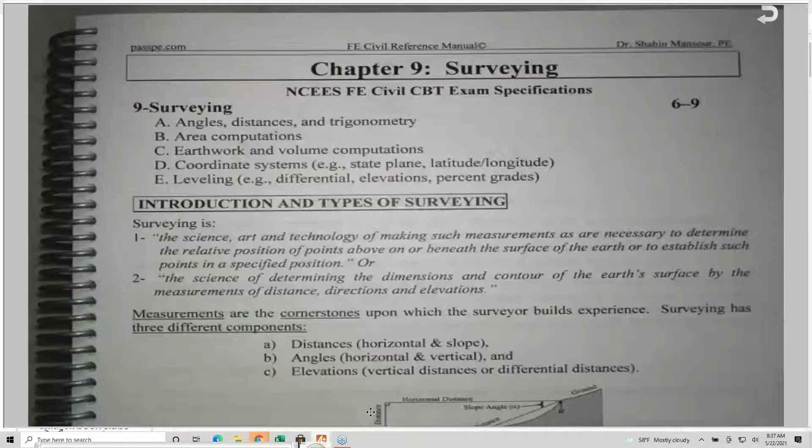So let's start. I started last time, and I will start the surveying chapter from the beginning, and I will do my best. Bear with me, I know there's a lot of material. This is chapter 9. All of you received this, and during the lunch break, as I said, I will do my best to add the 2 problems I would like to add into the transportation chapter. If not, I will send it to you during the lunch break. Please print it, and we will go over transportation this afternoon.

So surveying is chapter 9 per the NCEES CBT exam specifications. Here are the topics listed by the NCEES. I took these topics and covered them using my surveying textbooks, in addition to all the surveying references I have in my library here.

So we covered this last time, so I will go over what I covered last time very quick, just to remind you. The definition of surveying, basically we are locating points horizontally and vertically. So there are two definitions I added here. This figure here, which is figure 9.1, shows the types of distances, the horizontal distance and slope distances. We'll talk about angles, horizontal and vertical angles. We're talking about elevations, vertical distance, or differential distance.

So this is figure 9-2, talking about differential leveling, where we have an instrument level and we have the surveying rod, and we take two shots and we can determine the difference in elevation between points, or determine the elevation of points if we need to do that.

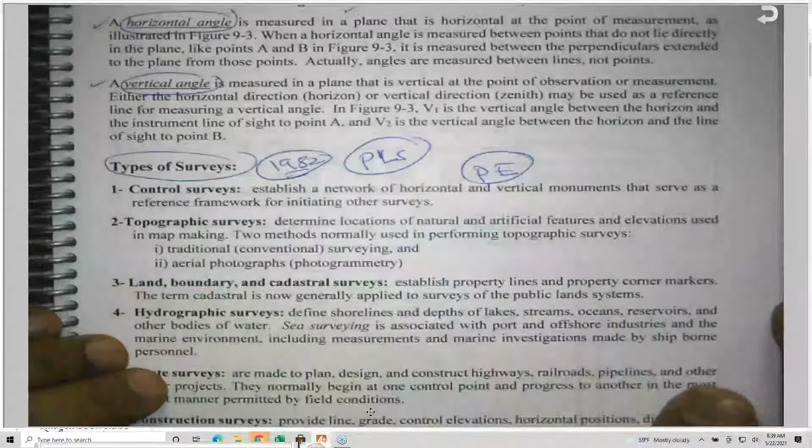I added the types of surveying just for your knowledge, because in January 1982, the PLS, the professional land surveyors, were a little bit unhappy that the PE were doing the same work as the PLS, so they changed the law on January 1st, 1982, where they limit the PE to do certain types of surveying. And the PLS, obviously, can do all kinds of surveying.

But any PE who is registered before January 1st, 1982, is legally entitled to do all kinds of surveying as PLS, but he cannot claim the PLS title because he did not take the examination and the process of getting the PLS license. So, for example, control surveys are limited only to PLS. We cannot do it right now, okay? Topographic surveys, yes, we can do it. Land, boundary, and cadastral surveying, no. Hydrographic surveying, yes.

I don't expect that they will ask you who legally can perform, because this is not listed among the NCEES topics. As-built surveys, which sometimes we call final surveys, after we finish the job with all CCOs and all the change orders. We are required, in fact, to establish the elevations and distances and everything for the job after it's completely done. So when an engineer comes after us, he will see what has been accomplished in the previous job. Mine surveys, solar and condominium surveys.

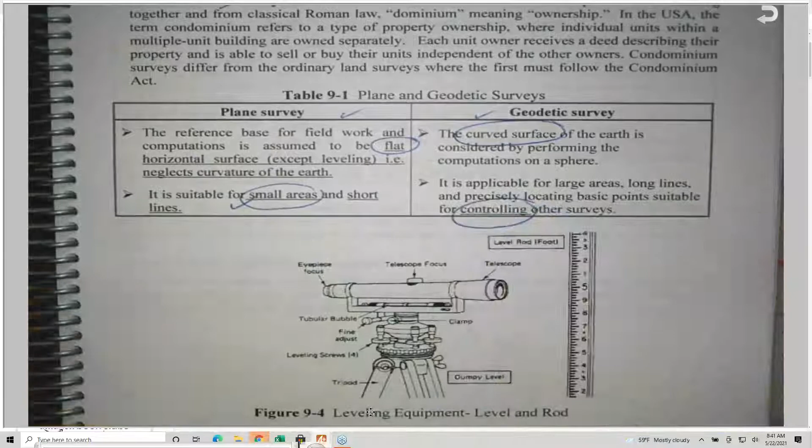Surveying in general can be classified as plane and geodetic surveys. Geodetic survey, obviously, takes into consideration the curvature of the earth. But in plane survey we are assuming that the earth is flat, and this is accurate enough for small areas and short lines. But geodetic we use for establishing the control surveys. Leveling equipment, we are going to see the level and the leveling rod. Figure 9-5, talking about horizontal distance, vertical and zenith angles. All these things are identified here.

Also, surveying can be classified as ground surveys, aerial surveys, and satellite surveys, and I explain the difference for your knowledge. And in the section given in the NCEES, they are asking you to be familiar with angles, types of angles, distances, types of distances, and trigonometry. This is the first key thing you might see on the exam as far as problems. So angles: interior angles, exterior angles, and deflection angles. Deflection angles are really important, and we're going to see them this afternoon when we talk about horizontal curves.

Figure 9-7 shows the types of deflection angles, either to the right or to the left. A deflection angle is formed by extending one line with respect to another, and right deflection angles are assigned positive and left deflection angles negative signs. The sum of the deflection angles for any closed polygon should add up to 360, taking into consideration the positive for right deflection angles and the negative for left deflection angles.

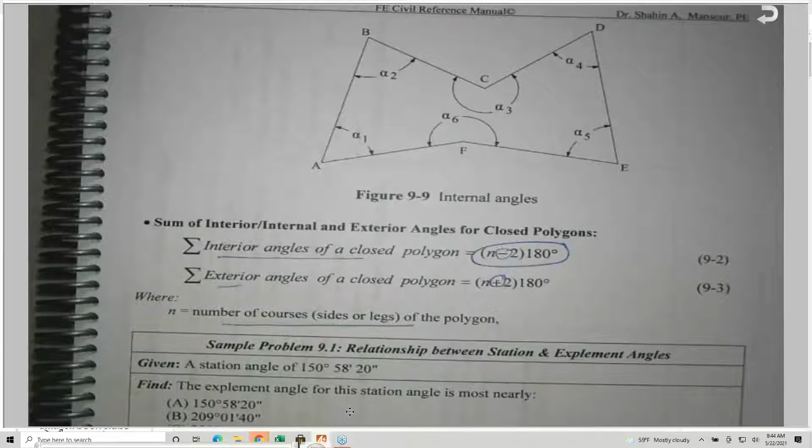And if I remember correctly, in the first homework I sent to you, there was a problem related to this, and I hope that you get a chance to work on homework number 1. I will try to find some time, like office hours, to go over homework number 1, and probably I will give you more homework related to the topics covered after that. So these two equations I need you to be familiar with.

We went over this problem very easily last time, 9-1. This table here shows the summary of the horizontal angles. Probably I will change the title, and please add this, "types of," to make sure that you are really aware that we are talking about horizontal angles. Okay, so the deflection angles, we said they add up to 360.

The n minus 2 is for the interior angles, and for the exterior angles, n plus 2. So this is a plus and this is minus. And here we're talking about horizontal angles, and probably I will modify this table to add the word horizontal, to indicate that we are talking about horizontal angles, not vertical angles, because it's very important to distinguish between horizontal and vertical angles. So if you flip the page, you will find the definition of two types of angles, vertical and zenith angles. So I define each one of them.

Vertical angles are really important. For the sake of the exam, I don't expect they will ask you about something related to zenith angle, maybe, but here is a definition just in case. And you need to be aware that for vertical angles, we have the plus and the minus. It is a plus if it is above the horizon, and a minus if it is below the horizon. So any vertical angle above the horizon or above the horizontal is considered positive. Any vertical angle below the horizon is considered negative, okay?

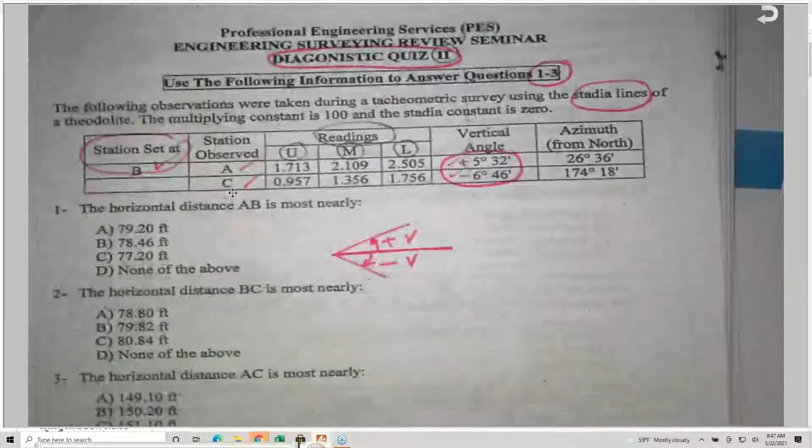And there is one problem specifically, I will be glad to send it to you, on the vertical angle here, plus and minus. This problem is a very good problem. In fact, it does have the law of sines and law of cosines, plus all the terms related. I will be glad to send it, or maybe I include it as part of the homework. But for the time being, let's focus on what's here, because I need to be very concise to the NCEES topics only, without really going beyond that.

Bearings, we talked about bearings. The bearing of a line is its direction within a quadrant. We have 4 quadrants, as you know, and for bearings we need the north direction or the south direction, and the angle in between, like southwest, northwest, northeast, and so on. So basically, you look to the north direction, and this is the south, this is the east, and this is the west. So the line could be here or here or here or here. So it is northeast and northwest, southeast and southwest. But we need an angle, degrees, minutes, seconds.

And as I mentioned last time, please do your best, whatever calculator you are using. This is the calculator that most of the engineers are using for the FE. It is the Casio FX-115ES Plus, and they have different new models, in fact, but most of them work the same way. If you are using HP or TI or other calculators, please do your best to make sure that you know how to convert degrees, minutes, seconds, because it's very important.

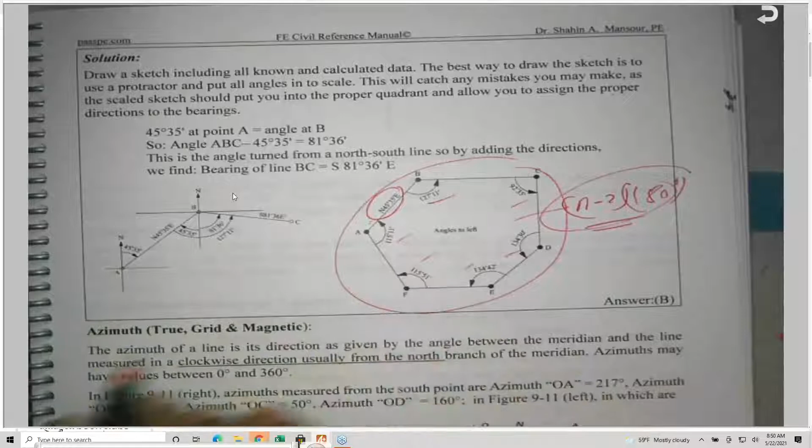Basically the bearing of this line is given, this is northeast. And if there is no adjustment for the angles here, in this case we are assuming that all the angles are correct, and after that we'll proceed with the calculation. This is northeast, which is a given bearing for line AB. For line BC, you draw, and here is the angle 127.11.

So in this case we can determine the bearing of this line, and always draw a sketch, please, a sketch or a free body diagram. Azimuth: the azimuth of a line is its direction as given by the angle between a meridian and the line, measured clockwise only. So the azimuth is measured clockwise only, and normally you measure from north.

And the azimuth could be, by the way, true, grid or magnetic, like bearings. A bearing of a line could also be a true bearing, a grid bearing or a magnetic bearing, and I'll be glad to talk about the difference between these later on. So basically you are rotating the angle clockwise, measured from north, and I give you some examples here.

We need to know also what is known as forward and back azimuth, and forward and back bearings. So for a line CD, when we say the bearing or the azimuth of the line CD, this is the angle CD, but for DC, in this case you are going to add 180 to it. So we have something called forward. So the bearing of line AB,

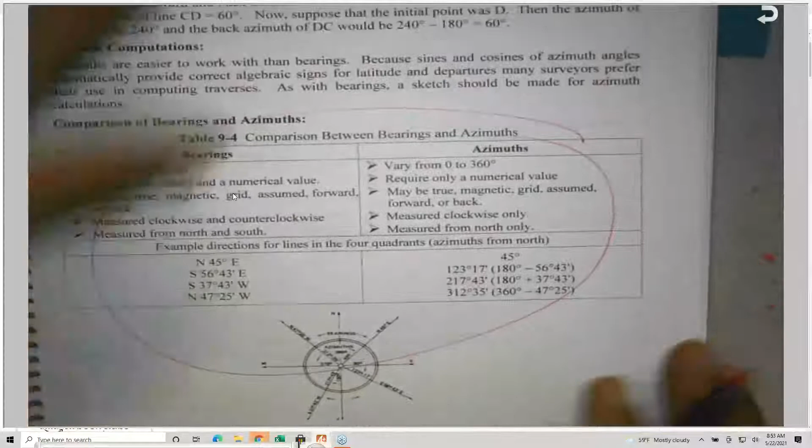I provided a table also. In all my books, the 15 books I have, I always try to make it as simple and concise as I can, with tabulated values or tables in general. I found it's a very effective way, and engineers like that. So this is the table that shows the difference between bearings and azimuths.

So bearings vary from 0 to 90. Azimuths are 0 to 360. Bearings require two letters and a numerical value, like northeast, southeast, southwest, northwest, and so on. So you need two letters and a numerical value in between. They might be expressed as true, magnetic or grid, or even sometimes assumed. Sometimes we assume a bearing, forward and back also.

They are measured clockwise and counterclockwise. So this is clockwise, and it could also be measured counterclockwise. It depends on the quadrant. We have, this is north, this is south, this is east, and this is west.

So this is quadrant number 1, and this is quadrant number 2, quadrant number 3, and finally quadrant number 4. So it depends on the location. But for the azimuths, the azimuth of a line is measured from north and measured clockwise only. Very rarely you will find that the azimuth is expressed from south, but they agreed from north and clockwise only. But for the sake of the exam, if he gives you azimuth measured from south,

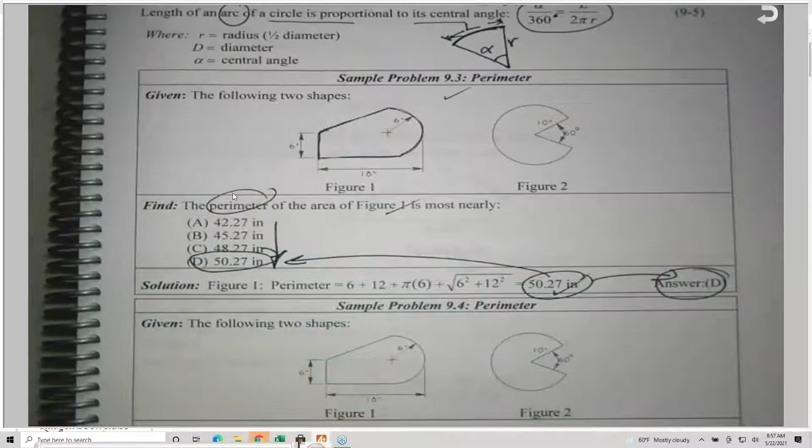A few problems. 9.3: we need to get the perimeter of this. Perimeter means you are going around it, walking or running, if you have a track like this. So basically, you are adding all these things, and this is very easy. The perimeter, here it is; check my calculations, and also look at the four possible answers. Sometimes I change the order. For example, this is 50.27, answer D. If you find a typo or a mistake, let me know, and the final copy will be reviewed more than once by me or by some of my assistants.

Problem 9.4 is asking for the perimeter of this figure 2. So basically I need this, and I need what is on the remaining portion of this circle. That is what is meant by the perimeter. I will go around this. I need this here, and this here, and the entire perimeter, but I will subtract this. There is more than one way to do it, by the way. This is the way I did it. I have 10 and 10, because the radius is 10, plus this is 60.

So what is left here? 360 minus 60, which is 300. So 300 degrees. That's why I use 300 degrees, the difference from the entire circle angle, which is 360. So I proportion the 300 with respect to 360 and multiply by 2 pi r, as if the circle were complete, but we are missing a portion of it. So in this case, we proportion the central angle with the entire circle angle, 360. And again, 72.36, this is answer B. So far, so good.

If you look at the trig, there are two important laws, and these are given in the math section. I hope all of you have the NCEES handbook 10.0, which I mentioned more than once. You can download it or purchase it from the NCEES. Please do your best to get this, because I will refer to it a lot. Every time I need to show you where these equations are located in the book, because this is the only book you will be seeing on the exam.

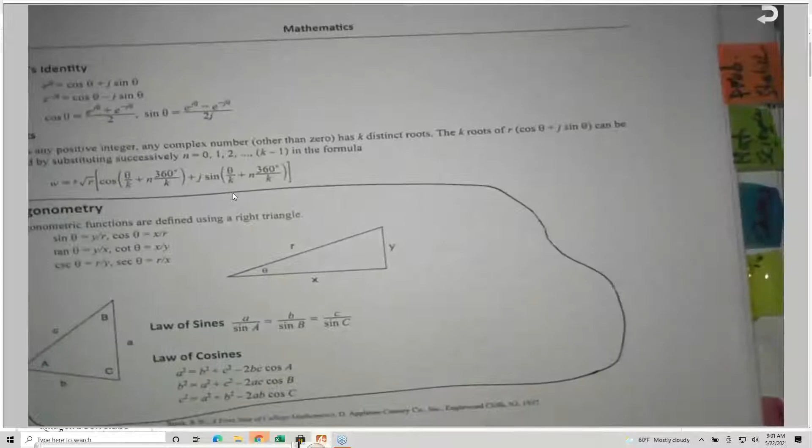If you have suspicion about one of these equations, you can go to the section of the NCEES reference book and locate it. For example, this is what I'm looking for. Here it is, on page 37.

So the trig section, here it is. This is the definition of sine, cosine, and tan, and here are the two laws I'm talking about. This is on page 37 of the NCEES book, and I'm using the same notation they are using: A, B, C, and here are the two laws I just talked about.

Be careful, because the angle will be given to you in a certain way. If you do this math, you will not get this directly. You'll get an angle in degrees, and after that you are going to convert it to degrees, minutes, seconds, as indicated here.

Area formulas: we have area by coordinates, trapezoidal rule, and Simpson's 1/3 rule. Those are the three methods discussed by NCEES. There are other methods, but those are the three given in NCEES. The reason we need to calculate area is because it's used to calculate the volume of earthwork. We're going to see three methods: the average end area method, the prismoidal formula, and the prism or pyramid or the 1/3 rule.

I did my best by providing a little bit of theory about what I'm talking about, for example methods of measuring areas. Can we measure an area? Yes, it could be measured or it could be calculated.

Field measurements, if you go to the field, will be more accurate. If you have a piece of land and I ask you what is this area here - the parcel I bought - and I need you to verify the area is right, you measure the dimensions, and then you can divide it into small figures, regular figures, or simple figures: rectangle, triangle, trapezoid.

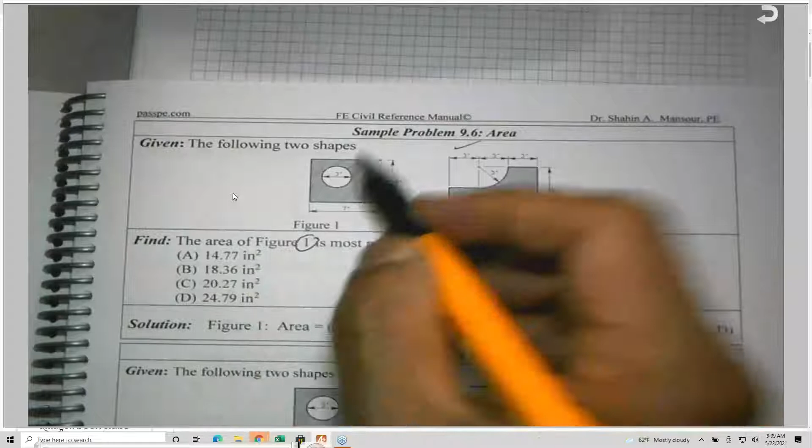9.6. I have two figures. What is the area of figure 1? So the shaded area, this is probably what is meant, at least this will be much more precise. So basically, you can take the entire area and subtract a quarter circle and subtract the circle.

And this is what I did here. So you can say that this is 5 and this is 7. So 5 by 7 will give you the area of this rectangle. And you subtract a quarter circle, which is pi r squared divided by 4, which is a quarter. After that, we subtract the area of the inside circle. So this is one way.

There are some engineers who do it differently, or you may do it differently, but normally I encourage everybody to ask, if you solve a problem, this famous question I raised last time: is there any other method, or way, a shortcut if you like to call it that? I have no problem with that, because we need to save time. So if you solve the problem, ask yourself is there any other way to do it that's much easier, less computation, or fewer steps. Please try to ask yourself this question, because time is the biggest enemy for you during the exam.

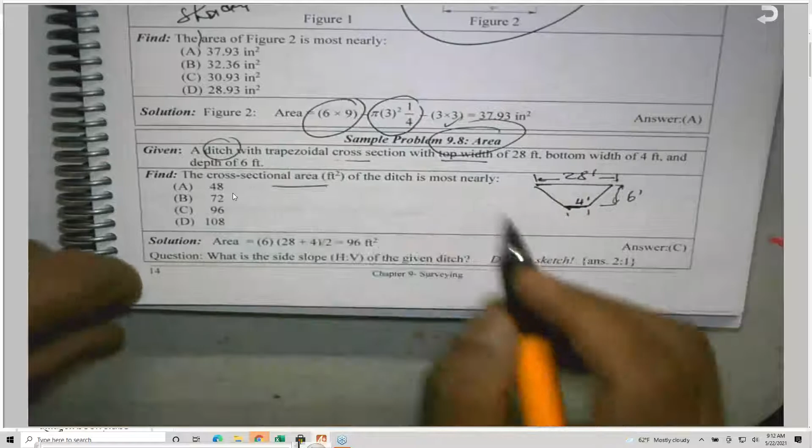So basically, this is a trapezoidal shape, like an irrigation channel or a ditch, something like this. So it's asking what is the cross-sectional area. This is an easy one: this plus this divided by 2, times h, and here it is. And units, by the way, be careful. Sometimes they can ask for this area in inch square, yard square, name it.

So we need to be familiar with the SI units. I believe the exam is given also in SI, if I'm not mistaken. I don't know if they mentioned this at the beginning or not, but I believe the SI units, the System International, could also be included. They have tables at the beginning to convert the units, at the beginning of the book, by the way: units and conversion factors.

This is the NCEES. You need to be familiar with this because we have the acres and square feet. How many square feet per 1 acre, the famous number 43,560, and also they have it in metric, so we need to be familiar with the metric also. And they have the significant figures also in the brief. This is page 1, by the way, units and conversion factors, on page 1 of the book.

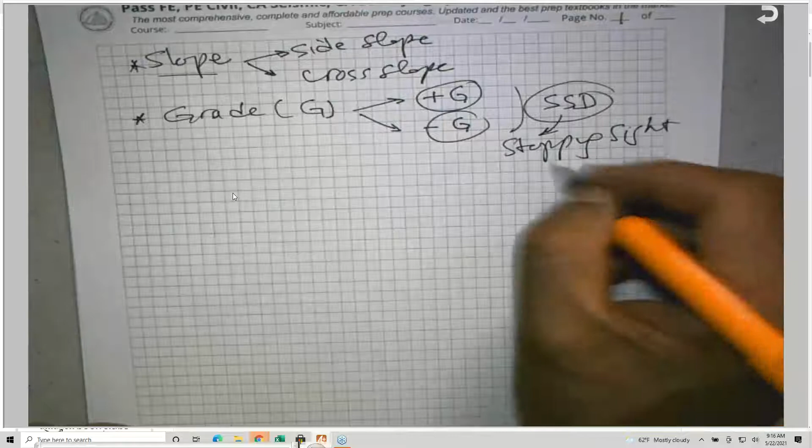And the one we covered last time, do you remember? Saturated surface dry. This is for the aggregates, for the coarse aggregate and the fine aggregate. After we do the calculations, we need to make sure that we adjust the fine and the coarse to the SSD condition, saturated surface dry condition.

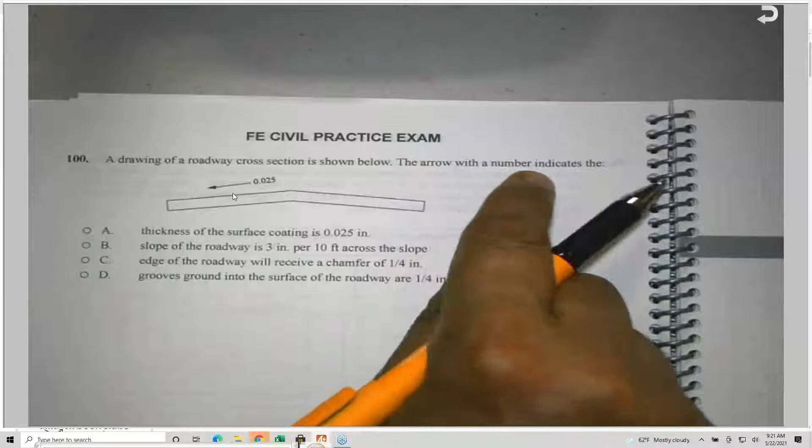For example, here, this is a cross section. A drawing of a roadway cross section is shown below. The arrow with a number indicates what? So this is what I'm talking about. This arrow here, and we put the number. We put, for example, 2%. Or sometimes we put it that way, as 0.02, like this. This is the same as 2%. So this is correct and this is correct. Normally we prefer the percent, but he gave it to you like this.

So the arrow with a number indicates what? This number here indicates the thickness of the surface coating? No. The slope of the roadway is 3 inches per 10 feet across the slope, or the edge of the roadway will receive a chamfer of 1/4 inch, or a groove ground into the surface of the road 1/4 inch deep. So what do you think? And again, they give you 4 possible answers, and you need to make sure that you are picking the best. And some answers sometimes confuse you.

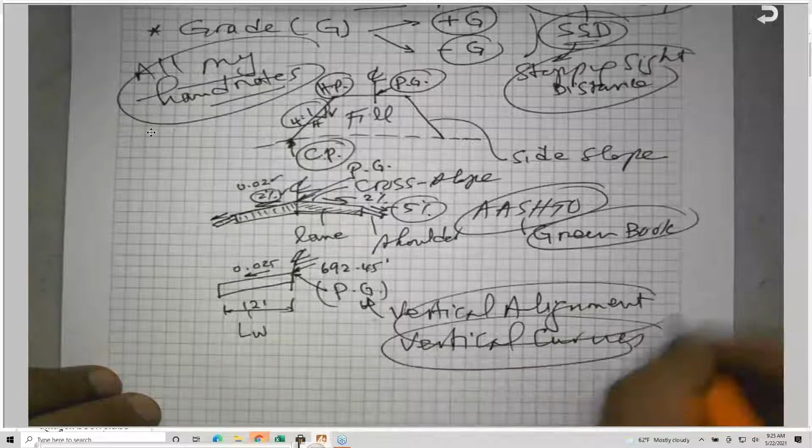So if this lane is 12 feet, which is a standard lane width, we call it L sub W, lane width, and this is given as 0.025. This point here has an elevation. Let's assume it is 692.45 feet. If this is the center line, this is the profile grade, we call it PG. Sorry, I'm using a lot of abbreviations; you will recognize them by repetition. The PG is the location of the vertical alignment, which is basically vertical curves. We're going to see it this afternoon. Vertical alignment consists of vertical curves and tangents.

So right now, if this is 12 feet, how much is this elevation here? We call this ETW, edge of traveled way, and this edge of shoulder, ES. Some books call it E sub P, edge of pavement, but ES is the name commonly used. So if this elevation is given to be 692.45 based on your profile, which is the vertical alignment. Profile, vertical alignment, vertical curves, they all mean the same thing.

So this distance, that 12 feet, is measured horizontally. Shall we consider the slope? Yes, but it will not make much difference. So this elevation here is 692.45 minus 0.025 times 12 feet. This gives me the elevation of this one. It is lower to ensure that the water will run and not stay on the lane. So the slope and the cross slope are very important, and I will repeat them again.

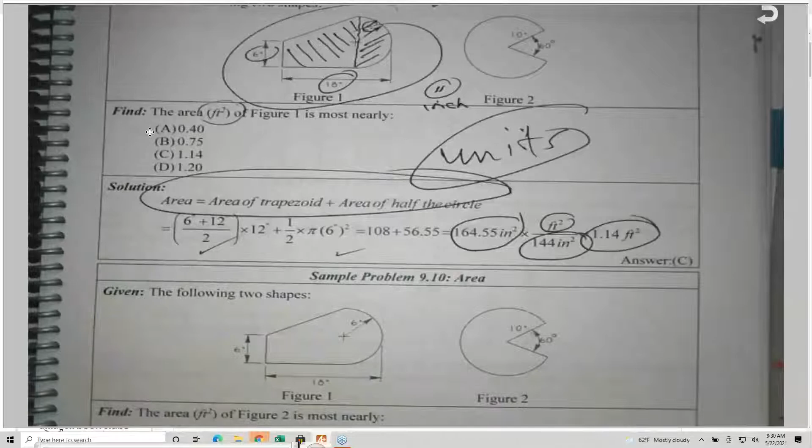Common units, okay? And probably some of you took a class with me before. NASA is a great agency, but one time they lost a satellite because of the units. To the best of my knowledge, it was from English to metric, so they lost a satellite. It was very expensive because of units. So don't misunderstand me. NASA is a great agency, but they are human like us. We make mistakes, but they review everything, not once, not twice, 3 times. But units, so we don't like to lose the exam.

How much do they charge for the exam nowadays? 225 for the exam, I believe. Or they reduced it. I believe they reduced it to 175. They give discounts nowadays. Okay.

So we don't like to lose the exam because of units. NASA lost a $125 million satellite because of units. We don't like to lose the exam because of units.

I needed to remember what is the current price. It doesn't matter, because time is more valuable than money nowadays. Time is money, and especially you are going to stay away from the family, and the family will complain, my God, when are you going to finish the FE? Then you need to tell them, wait a second, it's not just FE only. After the FE, I'm going to go for another exam. It's called PE. Oh my God. So let us just take one at a time. Let's finish this first, and after that, go to the second.

Okay. Problem 9-10, which is the following problem here. This is the second figure. We need the area of this figure too. Again, we are missing this portion here. So it is the area of a circle. Assume this is a complete circle, and I'm going to deduct the area of a sector.

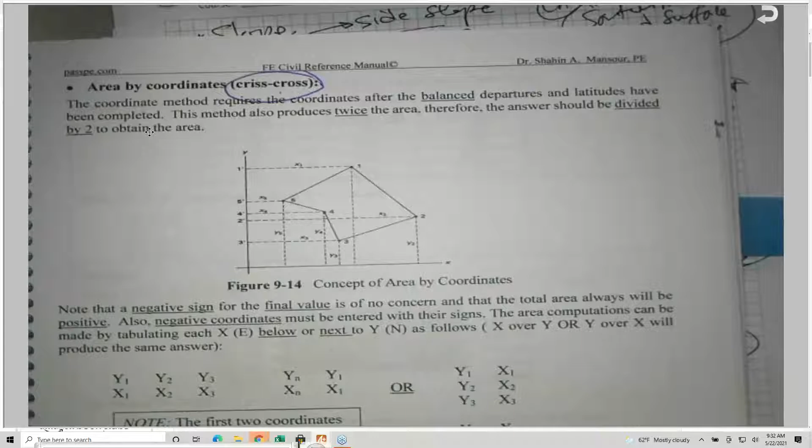They call it coordinates, which is a standard name, but some surveying books are using crisscross. I need you to know two facts about this. Let me write it down. Okay. At least you can write it after me. Okay.

Okay. So the area by coordinates, fact number one. In order to do it right, this method will give you twice the area. So you have to divide by 2. So this is fact number one. When you calculate the area, don't forget the 2. The 2 is already built in the equation, but sometimes we forget that. But I need you to know that this method will give you twice the area. This is fact number one.

Fact number two, in order to do it right, you must repeat the coordinates of the first point. Repeat the coordinates of the first point. It translates into English, Dr. Mansour. Here we go. Because again, we need to make sure.

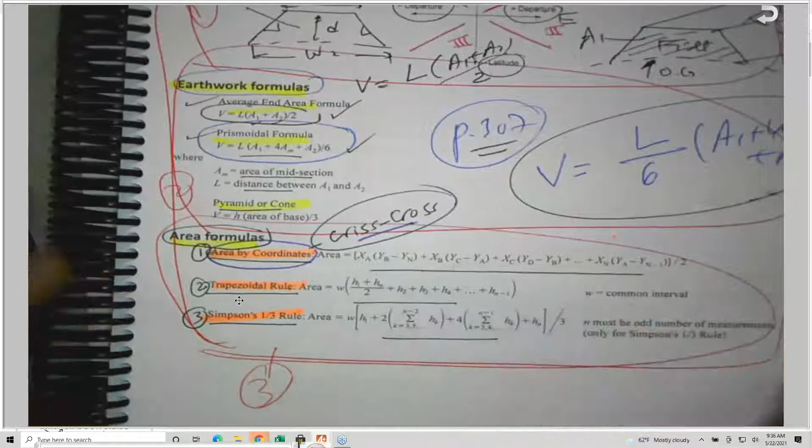Okay? So if this point is minus 3 and 6, and B, for example, is minus 3 and 9. And this here is minus 1 and 12. And this is 6 and 14. Assuming that these coordinates are given.

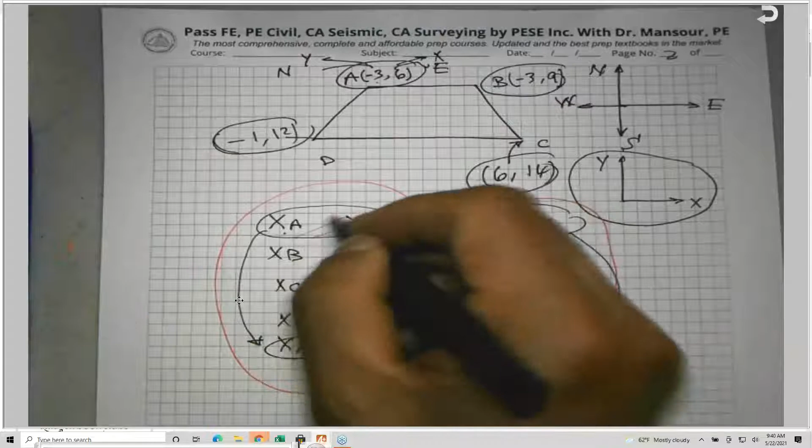Okay? So this is correct and this is correct, as long as I enter the coordinates with the same order. If I start with X, I have to start with X for all of them. If I start with Y, I have to start with Y for all of them. And don't forget, the first two coordinates must be repeated. After we put these coordinates like this, whatever the numbers, I do something, and I need you to pay attention to this. He gave you the equation, but I need you to understand this, because of one little tiny mistake, if you did it on the exam, or if I did it on the exam.

So what is the coordinate method, or crisscross? We multiply this times this, and this times this, and this times this, and this times this.

So the area, sometimes we use A for it, okay? Basically, it is 1/2, because we said that this will give you twice the area, so I have to divide by 2 and open a bracket. I multiply XA YB, plus XB YC, plus XC YD, plus XD YA, and close the bracket.

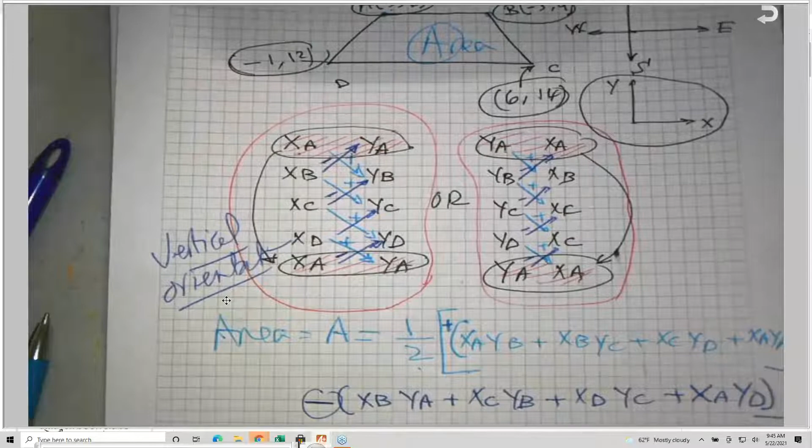This is if you arrange the coordinates vertically. This is vertical orientation. Can you do it horizontally? Yes. For example, this is XA, YA, and this is XB, YB, XC, YC, XD, YD, and don't forget to repeat the coordinates of the first one, XA, YA. So these two coordinates must be repeated again.

And in this case, this is a plus, 4 multiplications, and this is a minus. And it will also give you twice the area. So this is correct, and this is correct, as long as you maintain the order: XA YA, XB YB, XC YC, XD YD, and you repeat XA YA at the end. Don't forget to repeat, and after that, designate a direction to be positive.

The negative, by the way, may be larger than the positive, and you end with a negative area. There is no such thing as negative area. This depends on the direction. We take the absolute value. So don't be surprised if the negative products are larger; it depends on the direction. Don't worry about it. This is the best way that I teach it for the class, and I will examine the equation.

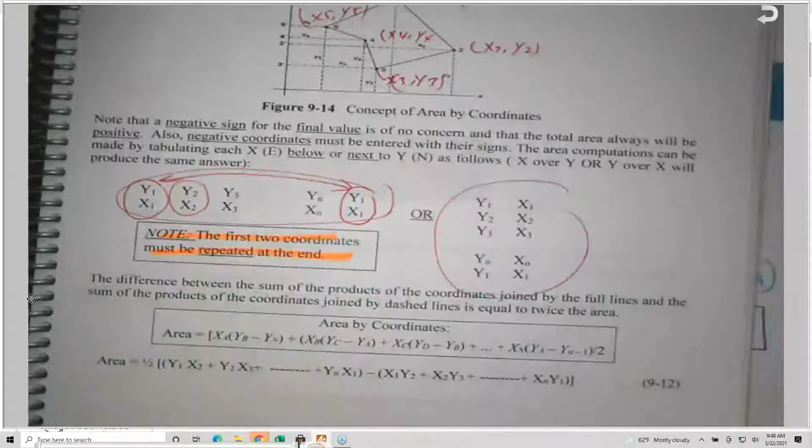But the most important thing is that X1 Y1 or Y1 X1 must be repeated again. I put this here as a note: the first two coordinates must be repeated. And I mentioned that this will give you twice the area, so you have to divide by 2. As you can see here, vertically, Y1 X1 and Y1 X1 are repeated.

This is the equation that is given in your book, in the NCEES. Here it is: XA times (YB minus YN), YN is the last one, plus XB times (YC minus YA), plus XC times (YD minus YB), and after that, they divide by 2, because it is twice the area.

We need to guarantee this problem because it is easy and straightforward. And this is the equation.

He arranged it that way. This is the NCEES equation. But be careful, this is YN minus 1. Be careful, okay. NCEES, NCEES.

My preference is my equation, which came from the 1/2. You can put the 1/2 at the end, by the way. It's not a big deal.

And I have here, these are the pluses and these are the minuses. But I put the minus here. And I said Y1, X2, this Y X2, Y2, X3, Y2, X3, and so on until YN times X1. So I finished.

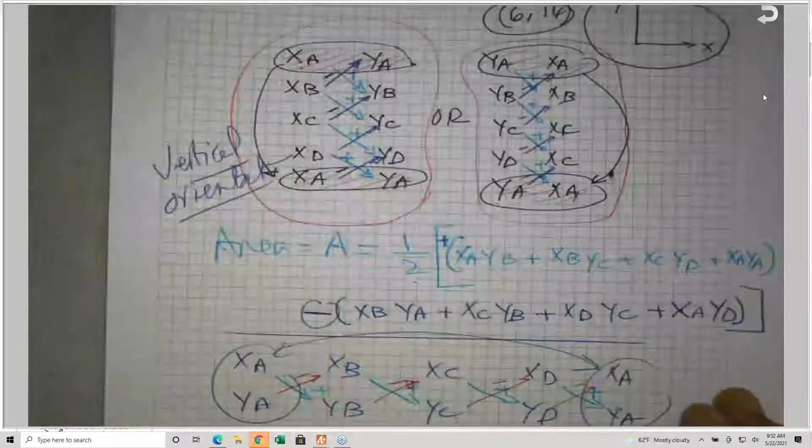This is exactly as the NCEES. Let me see if I wrote something wrong here. I don't know which one you are referring to. In your notes, in my notes, okay, let's look at my notes. Probably I did something wrong.

Let's correct it immediately. Okay, so it is 1/2 X A Y B plus X B Y C plus X C Y D plus X D X D Y A. Yeah, this is... X D Y A, okay. Sorry, here it is, X D Y A.

That's correct. And after that, X B Y A, X C minus X B Y B, X D Y C, and X A Y D. That's correct. So this is a typo, or the mistake that our friend found. Thank you very much. So this is X D, Y A, which is the last X D Y A. So I put X A, okay.

So please pay attention to this, and it is very easy and straightforward as long as the most important thing, which is fact number 3, if you have negative coordinates...

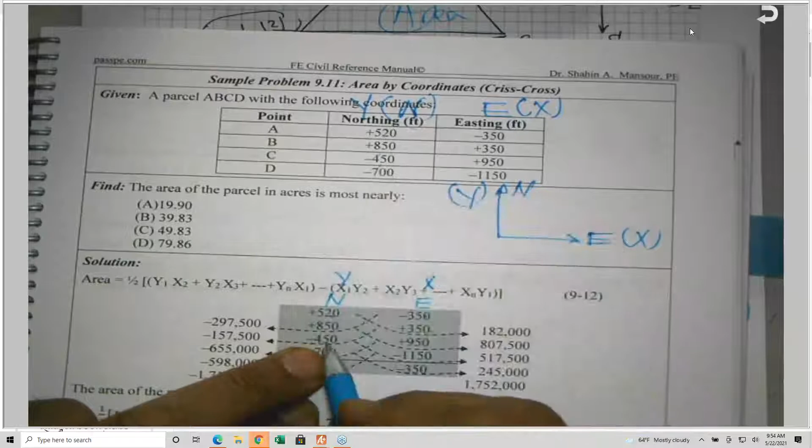And the second one, 850 and 350. And minus 450, you have to enter it with the sign. Okay, a plus 950. Negative 450, 700. And don't forget that the first two coordinates are repeated again.

Here we go, I will put an arrow like this. And there is a minus here. And don't forget the half.

And the area could be in acres. These coordinates are in feet, so we need to divide by 43,560, because 1 acre is 43,560 square feet. Who said that? As I told you at the beginning of the book, on page number 1, you will find that the one I was referring to is on page 3: 1 acre is 43,560 square feet. Here it is.

And I'm sure that all of you remember that. So if the minus is greater than the pluses, don't worry, the area will take the absolute value. So if you end up with a negative number, don't say, oh, what does it mean, negative area? No, it's just the direction and the order.

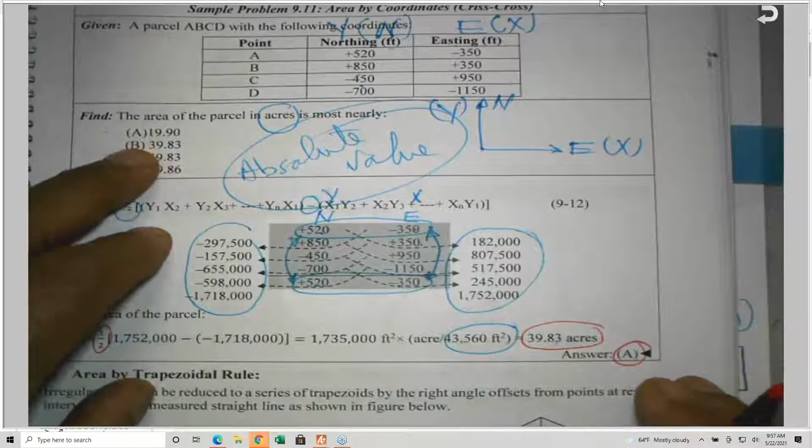Probably, because this is twice this, and probably that's what I meant. I will review it one more time. Okay, I will review it one more time.

So these are the products, four products, okay, minus, and this is a plus. So it is 1752 minus this, the minus, so it is the total, and 1/2 divided by this. Let me bring my calculator very quick, the other calculator.

So I believe there's a typo here, it could be, so this is 1718 and 1752 plus 0.5 times, so 1735, that's correct, and 43,560 divided, and 100, okay.

So 1,735,000, enter 43,560 divided, so 39. So this, the answer is B as in boy.

Okay, and I will review it one more time because here it is. Okay, so the product here, but this minus is a part of the equation. Okay, but this minus here, because some coordinates are minus, so this is the sum, by the way. This is the sum, this is the sum. Here it is, if you add all this, we end with this, end with this. So minus will be plus, and take half, and you divide it.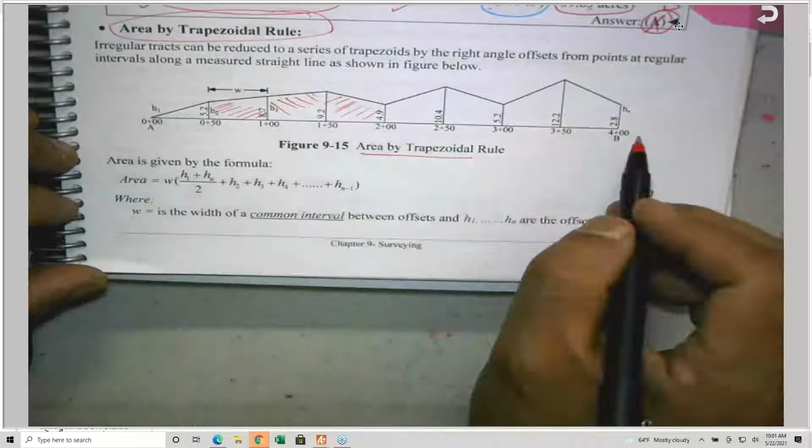Okay, so a trapezoid, obviously, this is an area by the trapezoid rule. This is a trapezoid, okay? So basically, we have a reference line, like line AB. And here are stations. This is station 00, station 0 plus 50, station 1.

Station is a distance, okay? Station is a distance, and we're going to see that. So in this case, the area will be like this. The W, which is the width.

Here it is, the width, and this is a common interval, meaning that the width is constant, that every 50 feet, this is 50 feet, and this is 50 feet, and this is 50 feet, or 50 meters, it depends on the units, is a station. A station is 100 feet, or 100 meters. And half a station, obviously, it is 50. This has H1, H2, H3, and so on.

And this is the equation that is given, which is the same equation, I believe, in the NCEES. Let me make sure that normally I try to use the same notations they are using, because I don't like you to be confused. Yeah, here it is, so this is exactly, I'm using the same notations they are using for a trapezoidal rule. This is the NCEES equation. So this is easy and straightforward, and you'll find that I solve a problem.

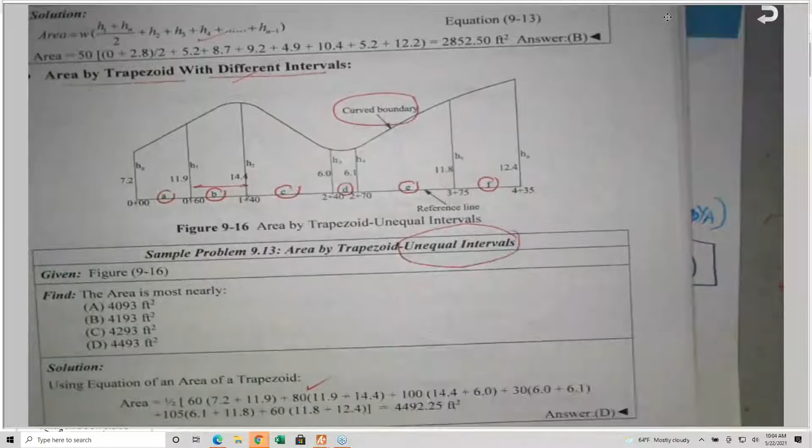But this is of unequal intervals, and he might ask you about that. Make sense? So you need to be aware of that.

So I need you, please go over these and let me know if you have any question about this. I included something about the planimeter, even though it's not mentioned in the NCEES, but I said, let me go over it.

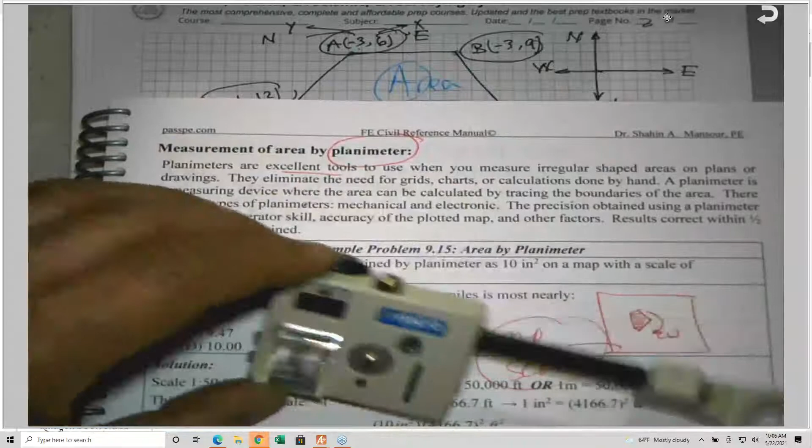This is something called the Vernier scale. A very, very old method, but still they're asking the engineers who are taking the exam for California PE about the Vernier scale and how to read it. No, nobody will ask you that nowadays, we have digital, but they're still asking what is a Vernier scale.

So let me give you a little bit of an example. I said that the area of a lake is obtained by a planimeter, and it was found to be 10 inches square on a map that has a scale of 1 to 50,000. This means 1 inch is equal to 50,000 inches, or 1 foot equal to 50,000 feet. So 1 inch on a map is equal to 50,000 inches on the ground, or 1 foot on a map is equal to 50,000 on the ground. So this is the scale.

What does this mean? I explain it here. Since I have 10 of them, 10 inches square, I multiply by the 10 inches square, 1 inch square equals this, and you divide by 5280, because you need the area in square miles. Again, this is another example. So this is the planimeter.

The last set of equations provided in the NCEES is related to volume. And he gave you 3 sets of equations: the average end area method, the Prismoidal, and the 1/3 rule, or as we call it, the pyramid, or the prism. I'm going to page 307, the average end area, the Prismoidal formula, and the pyramid or the cone.

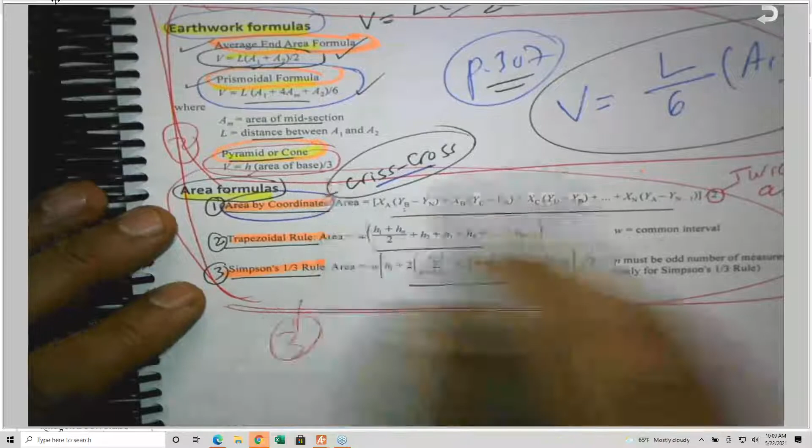Earthwork and volume computations is another area that they expect you to be familiar with.

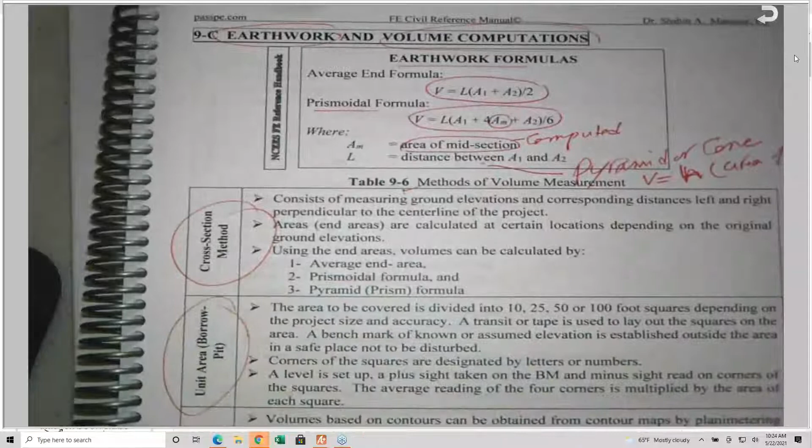The most important thing about the prismoidal: the A sub m is the area of the midsection, and it must be the computed area. It's not the average of the 2, by the way. It must be computed. And you will see this on the following table. I have here table 9.6, talking about the cross-section method, the borrow pit volume, and the contour methods.

So these 3 methods, we are here talking about the cross-section methods only: the average end area, prismoidal, and the prism, which is the 1/3 rule. I took each one of these and I drew something for you. The average end area: basically you have two areas, area at the beginning and area at the end, and they are separated by a distance L. So the volume is equal to A1 plus A2 divided by 2 times L over 27 if the area is in square feet as indicated here.

It could be in cubic meters also. So this is called the average end area. You add these two areas, and I need you to be aware of the advantages and disadvantages of each method. This method gives approximate and larger volumes; it always overestimates. It ignores the slopes and the orientation of the ends and the sides.

You can increase the accuracy by decreasing this distance. And obviously it favors the contractors because it overestimates. And we use it also for the wedge. We're going to see a table on the following page. So this is called the average end area method.

The second one is called the prismoidal. So they said instead of relying on two areas only, we're going to come halfway. So this is L over 2 and this is L over 2. Halfway between the two areas, we're going to get another area in the middle. It's called A sub m. But the A sub m must be computed. It's not the average of these two. If you take the average of these two, we did nothing. We went back again to the average end area method.

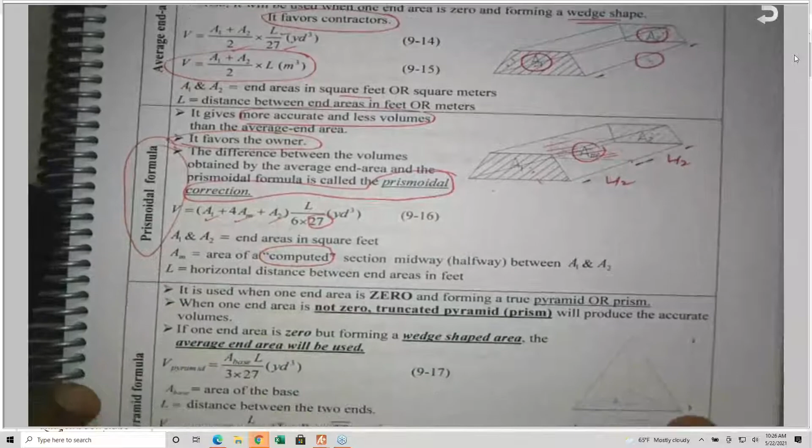In fact, this method, the prismoidal, gives more accurate and smaller volumes. This way it favors the owner. And the difference between the volume from the average end area method and the prismoidal, they call it the prismoidal correction. And this is the equation. It is L over 6 times A1 plus 4Am plus A2, and the 27 is just a conversion. So this is called the prismoidal method or the prismoidal formula method.

The third one is the pyramid or the prism, which is the 1/3 rule. We use the 1/3 rule when one end area is equal to 0. This area must be 0. And the area of the base is known. This is the area of the base. So they call it the 1/3 rule.

The 1/3 rule, okay? Basically the volume is equal to the area of the base times L divided by 3 and the 27. And these are the three equations given in the NCEES. If the other end area is not 0, like a truncated cone or a truncated pyramid, there is another equation I included just in case.

And in the material section, if you go back to the previous chapter, if you remember the slump cone that we used, I calculated the volume using this equation, which is called the truncated pyramid or the truncated prism, which is L over 3 times the area of the top, plus the area of the bottom, plus the square root of their product. So if you would like to remember this, because it's not given, that's fine. If not, if you have an area that's really small, you can use the 1/3 rule, but it will not be as accurate as the truncated cone.

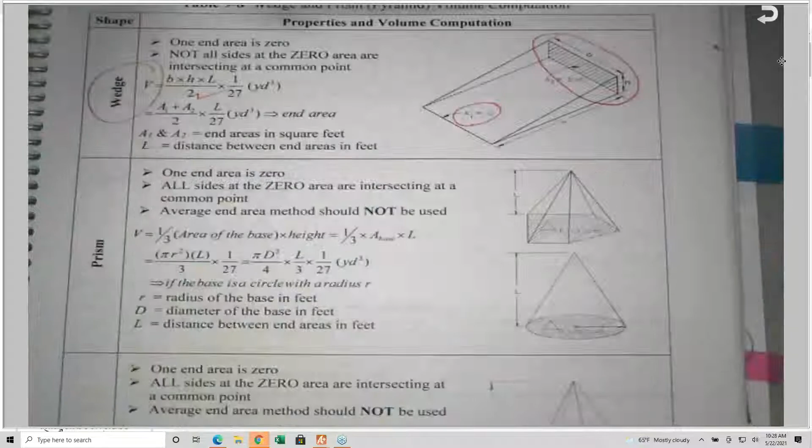We have something called a wedge. What is a wedge? Like when we have ramps, we have an area at one end and the other area is 0. So even though this area is 0, we are still using the average end area method, because this is a wedge, not a prism. A prism means that all the points are meeting at a common point, like a pyramid. So we are using the 1/3 rule there. So I need you to be aware of the difference between the prism, the pyramid and the wedge. For the wedge, we are still using the average end area method.

So in any project, we have the original ground, the OG, which is the first thing that we do. We survey the job and get the DTM, digital terrain model, for the original ground; I need to know how the ground looks. After that, as an engineer and designer, you design the profile. This is your choice. Normally, we try to make it balance, and it depends on many constraints. So this is a profile grade, PG, or the vertical curve that we design. So we have a series of cut and fill.

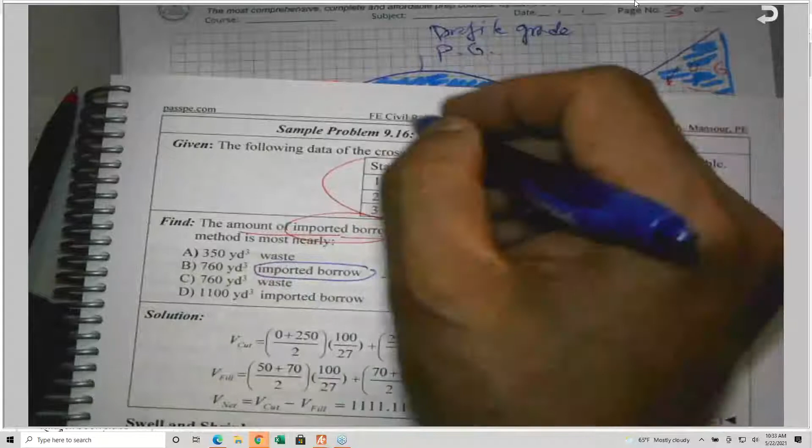So imported borrow, sometimes we use the abbreviation IB. So we need to calculate the volume of the cut and the fill. Here in this problem 916, it did not tell you which method. Automatically we use the average end area. If it's not mentioned, or it's mentioned to use the average end area, that's good. If it's not mentioned, I will use the average end area method. This is the default.

In the surveying book, the method is not mentioned, but here I specify the method. If it doesn't say, the average end area method is used. In the problem given here, he specifically said that I need to use the prismoidal formula. So we're going to solve it also. So I need to calculate the volume of the cut and the volume of the fill and take the difference.

So the volume of the cut, I got 0 plus 250 divided by 2 times 100, divided by 27. 250 plus 100, straightforward. Don't forget the 27 because we need it in cubic yards. And the areas here, and this is the station. Between here and here is 100 feet, as all of you know. And from here to here is 100 feet also.

So we calculated the volume of the cut and the volume of the fill, and we get the net volume. The volume of the cut is more than the volume of the fill. So we have cut greater than fill in our case. And that's why we selected answer C, extra soil. As I said, the soil will shrink under compaction, and it will swell if we excavate it. So there is the swell and the shrinkage. And this figure is available in almost every surveying textbook.

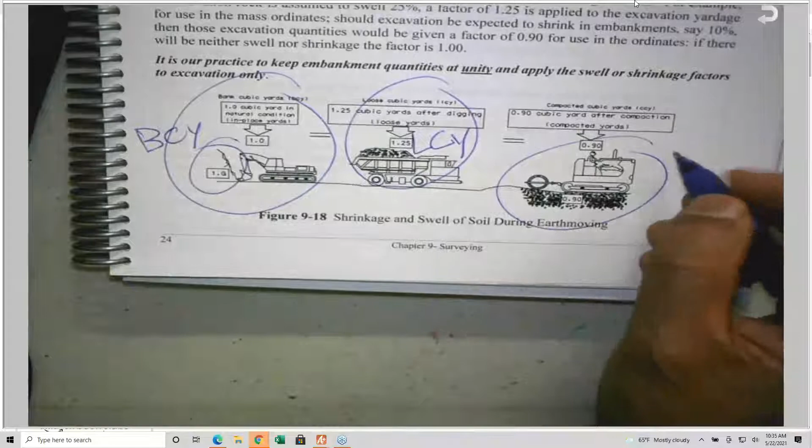This is called bank cubic yard, which is the original soil before disturbance. After we excavate it, it will swell, so we call it loose cubic yard, LCY. And after we place it and compact it with heavy equipment, and we spray some water to achieve the optimum moisture content, we call it compacted cubic yard, CCY. So there is BCY, LCY, and CCY. I need you to be aware of that.

There was a diagram I drew for you when we talked about concrete mix design. Do you remember concrete mix design? And I told you there is another similar diagram that will come when we talk about earthwork. In the diagram for concrete, we said that this is SSD, this is dry, and this is wet. And as you remember, from the dry condition, either air or oven dry, to reach SSD, we call it SSD moisture content.

And from here to here is the moisture content. Or sometimes we call it water content, as in the NCEES, and we use the letter lowercase w, if you remember. This is the diagram that I drew maybe one or two times.

There is a similar one for earthwork. And if you understand these diagrams, I believe you will be in very good shape and you will be able to solve. So this is for concrete mix design, the one we did last meeting. Now we are talking about earthwork.

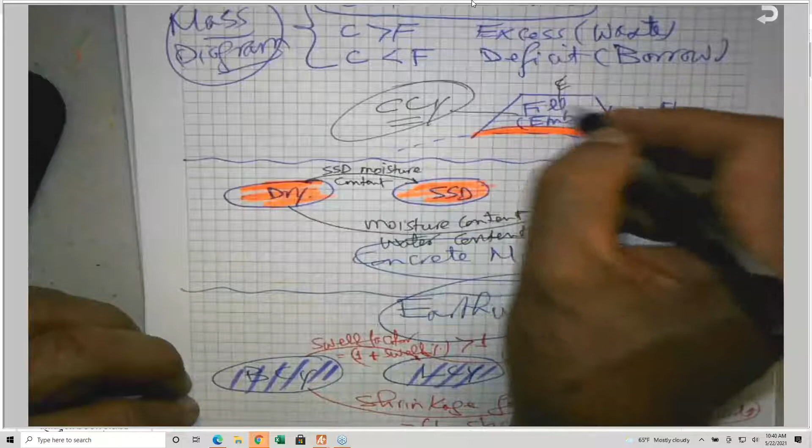Because after that, we are going to open this road to the public and the trucks and the loads will be here. We don't like this embankment to settle or to shrink because this will be a serious problem. Okay, so I need you to try to remember these two diagrams. I came up with these diagrams and I found them very useful in understanding the concrete mix design problems or the earthwork volume computations if there is a shrinkage or a swell factor included in the problem, and you need to make the adjustment for the volumes.

And for the PE, we cover this in depth, and I cover this in depth also with the surveying group. So this is the loose cubic yard and bank cubic yard. I defined for you what is a bank cubic yard, loose cubic yard, and compacted cubic yard, and these equations are the relationships from one volume to another. There is something called load factor. We use it for construction, which is 1 over swell factor.

Probably in the future, there's no need to add this. I will modify this to make it shrinkage. But the compacted cubic yard is equal the bank cubic yard times the shrinkage factor. And the shrinkage factor is 1 minus shrinkage percent. I need you to write this, please. And the swell factor is 1 plus swell percent. Okay, so converting from one volume to another, you might be asked about that.

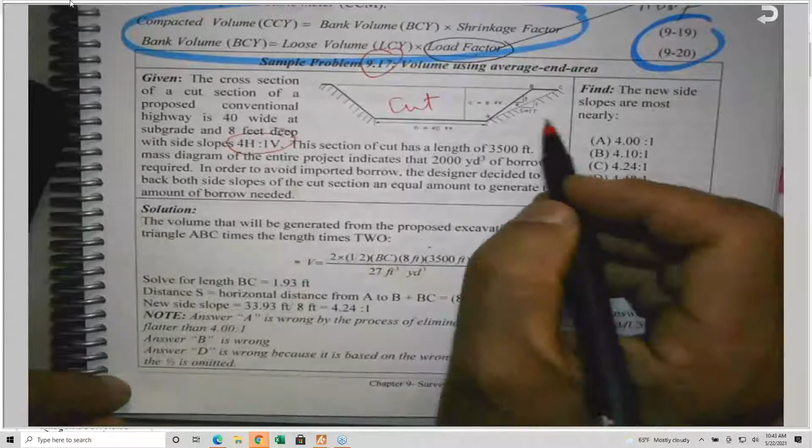So the section of this cut is 3,500 feet long. So the length, okay. The mass diagram, as I told you, is a tool we use to know the status of the earthwork, if we have cut more than fill or cut less than fill. So it indicated that we need an additional 2,000 cubic yards of borrow. So in order to avoid getting borrow from outside, it's called imported borrow, the designer decided to lay both.

So instead of having 4:1, I will make it flatter in order to generate the 2,000 cubic yards. So basically, I need to get the volume. So the volume, by the way, if you look at the 3 equations that they provided, we remember this from high school: any volume equation, volume is equal to area times length, or area times depth. This is the volume that we learned in high school.

If you remember the cylinder, if this is H and the diameter of the cylinder is D, what's the volume of this cylinder? Volume is equal to pi D squared over 4 times H, which is basically the cross-sectional area. The area here means cross-sectional area. You understand? Times the height, or times the depth, or times the length. So the same thing for the average end area method and the prismoidal and the 1/3 rule.

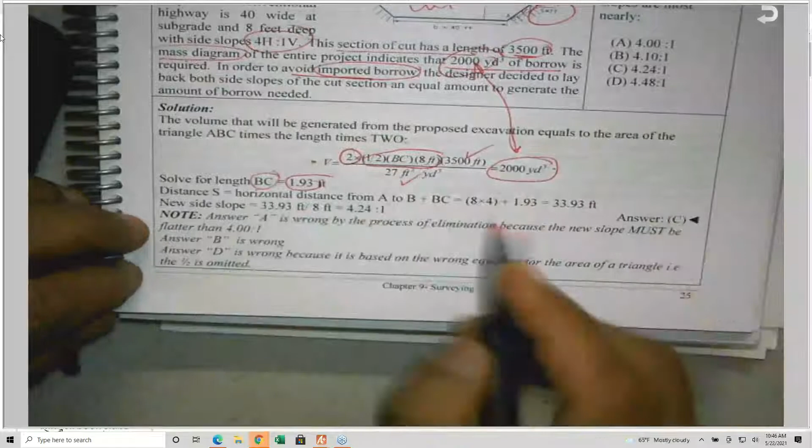And it is asking, after we do this, what will be the new side slope? Horizontal and vertical. So if I can get this dimension here, or the dimension BC, I can calculate, and this is the length of BC. After that, we can convert it to horizontal and vertical, and it came out to be answer C, which became flatter, obviously, instead of 4:1. Obviously, answer A is out, because we know the slope, 4:1, will be made flatter, so the horizontal is getting bigger. So by the process of elimination, you can eliminate this answer, and here it is, I mentioned this here.

So let's go to the problem that's given in the NCEES. Okay. Here, problem 50, he said using the prismoidal formula, the prismoidal volume is equal to L over 6 times A1 plus 4 AM plus A2. And this is in cubic feet, so we need to divide by 27 here. Okay, so what is the length from here to here? This is the length between 435 and 565. These are stations, and we subtract them like this.

We take 5.65, and I know some of you are doing this on a daily basis, minus 4.35, so it is 130 feet, which is 1.3 stations, divided by 6 and 27. And the A1 here is 322 plus 4 AM. This is the 395. By the way, this must be halfway. From here to here, it is 65 feet, and from here to here is obviously 65 feet. So this middle area must be halfway between the two stations, and this is the case here. If it's not halfway, you cannot use the prismoidal formula. So it is 4 times the middle area plus area number 2, which is 418.

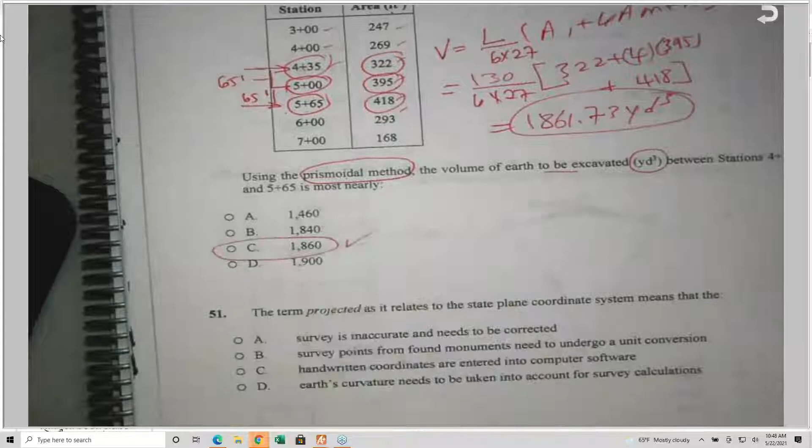Here he specified the method, the prismoidal formula. So in this case, you have to use the equation given in the NCEES. Any question about that? Easy stuff. Okay. Can you do this in the amount of time? As I told you, you have 330 minutes, which is 5.5 hours, and you have 110 questions, so about 3 minutes per question or per problem.

You have to be selective, by the way, because they give you 55 questions and after that they allow you to take a break. Then they give you the other 55, so the total is 110. This book only gives you 100 questions. Do you remember question number 100? The cross slope - this is the cross slope.

You need to calculate it, but basically 3 inches per 10 feet. So 3 inches divided by 12 inches per foot gives you a quarter, which is 0.25. This is in 10 feet, so you divide by 10 which gives you 0.025, which is 2.5%. You can also say this is 2.5%.

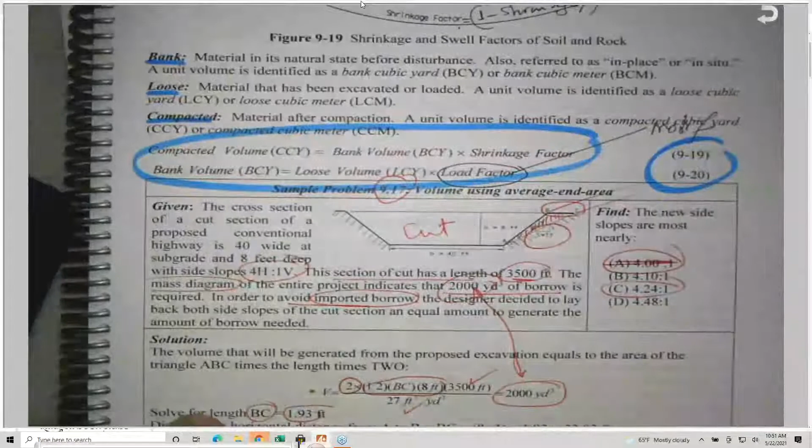So the average end area method, one-third rule, and so on. If you look at this problem - let me just, we only have 1 hour left. I need to finish, so let me wrap this up because I still have quite a lot and I'm sure you are going to come up with questions.

Coordinates are important. Coordinate or coordinates - northern and eastern, and or X and Y. If you are going to use X and Y, that's the rectangular coordinate system, or the northern and the eastern. We are using coordinates a lot.

Coordinates are useful in a variety of computations, such as determining the length and direction of lines and angles, calculating the area - do you remember the area by using coordinates - making certain curve calculations, and locating inaccessible points. Sometimes we have lakes, sometimes we have mountains, and we can use coordinates to locate points that are not accessible to us.

The state plane coordinate system, known as SPCS, is what we are using. Obviously each state has their own system, but the method that they are using - there are 2 methods. I hope I mentioned them here.

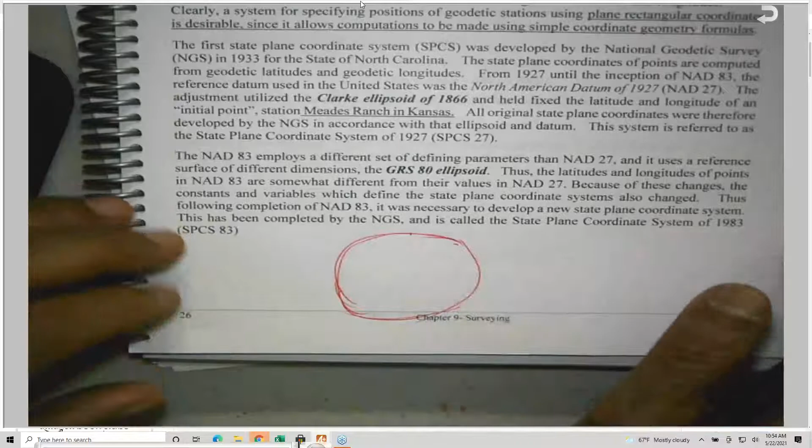When they started to establish the coordinate system, there were 2 scientists who came up with 2 approaches. One is called Lambert, conical shape, and Mercator, cylindrical system, where they intercepted the Earth. One intercepted with a cone, an imaginary cone, and after that they took this conical shape, the intercept with the Earth, and opened it or unfolded it and started to do calculations. So they established a coordinate system for us.

The first one that was used was in 1927. It's called the North American Datum of 1927, which is based on something called the Clarke ellipsoid of 1866. He came up with the dimensions for the Earth - the equator radius and the polar radius - and we calculate what's known as the flattening of the Earth, because the Earth is not exactly circular.

After that, with the new measurements and GPS and so on, they came up with what's known as the GRS, Geodetic Reference System of 1980, which is where the GPS is - the GRS 80 ellipsoid, and this is what we are using nowadays. So the old datum, NAD, the North American Datum of 1927, is gone, and right now we are using NAD 83, the North American Datum of 1983. This is the current system, the current datum for horizontal - because we are going to see in the following pages that we'll talk about vertical, because in order to locate points on the ground, or build our freeways, or build our roads, we must have reference datums.

I hope that you will have time, or I encourage you, there is a very important website. It's called usgs.gov, United States Geological Survey, very, very useful website. It does have maps, and it talks about horizontal datum and vertical datum. It even talks about seismic activity and maps. USGS, very important website. I encourage you, if you'd like to read more about the coordinate system or coordinates we are using here, to read this.

I gave you some numbers here related to the two references. The Clarke Spheroid of 1866, this is the old one, no longer exists. We're using the GRS 80 now, which is a little bit different. You can see the flattening of the Earth is a little bit different.

I have a problem here, number 918, talking about coordinates. It says that the coordinates of point A are given, northern and point B, and asks what is the bearing of this course. Right now, by the process of elimination, it's very important to know that this is north, this is south, this is east, and this is west.

So if you look at the first point A, this is northwest, it is somewhere here. And point B, the north value is less than that, so it is lower, and the west is before that, so point B is here somewhere, relatively — locating them relative to each other without being precise.

He's asking what is the bearing of the course AB, going from here to here. So my coordinate system for establishing the bearing of this line is like this. It's different from B to A — as I told you, there is a forward and back azimuth and bearing, as I talked about. So this is forward AB, where this is north, this is south, this is east, and this is west.

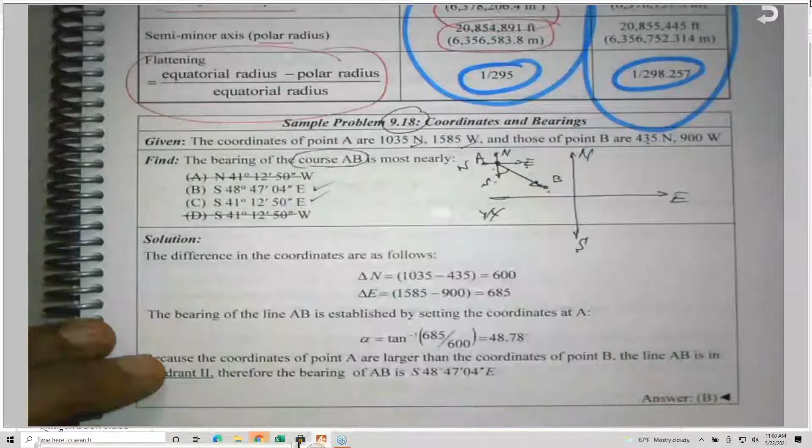So the bearing of the line AB must be southeast. Do I have southeast as an answer? I have one southeast and another southeast, so these two answers are out. It's called the process of elimination. So answer A and answer D are out. I need you to be aware of that — it's called the process of elimination. I mentioned it before more than once.

Process of elimination is where you eliminate answers that don't make sense. Because if you have only one minute left and a problem, if you can eliminate two answers, it becomes 50-50 — just pick one and pray to God that He accepts your prayer and you may pass. But if I don't know the process of elimination because I don't understand the concept, each answer is just 25% chance.

So we need to learn this. As I told you, the process of elimination is powerful as long as we study, because I know it cannot be northwest or southwest — it must be southeast. But he makes my life, or your life, difficult by giving two answers, both southeast.

So in this case, I need to get the angle alpha — what do they call it, I call it alpha. I need to get the difference: this is delta west, and this is delta north. So the angle alpha is equal to the inverse tangent of delta west over delta north, or delta eastern — it's not a big deal, if you like delta eastern, I have no problem.

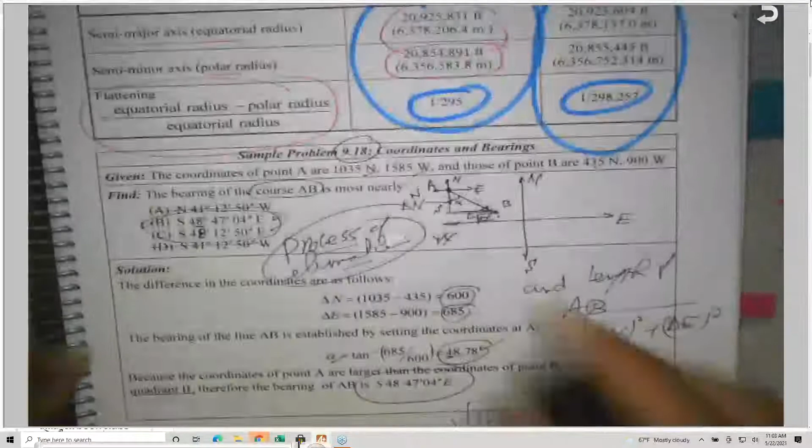He might ask you, instead of asking you what is the bearing of the course AB, he will give you the azimuth of the line AB. So the azimuth of the line AB, I need the angle measured clockwise from the north. So in this case, what will be the angle? Here it is, from here all the way up to here. This is the angle theta, for example. So the angle theta is equal to what? It is equal to 180 minus alpha.

And I know the alpha, subtract alpha from 180, so this will be the azimuth of the line AB, measured from north, clockwise only, as all of us know, clockwise. So the same problem could really be changed or modified to ask many things. He can ask what is the bearing of the line BA instead of AB, and so on. I need you to be aware of all these things: forward and back, forward azimuth and back azimuth, and so on.

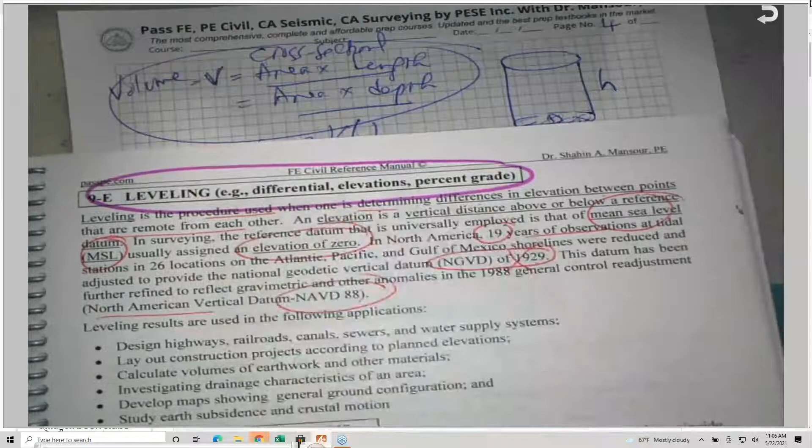Okay, so anything above the mean sea level is positive. Anything below the mean sea level is negative. There are some areas here in California that are below the MSL. That's why they have negative elevation below the mean sea level.

So why do we need to do this leveling method, or learn leveling? Because we use it a lot. Okay, design of highways, railroad, canals, and so on, layout, construction, calculate volume, drainage, maps, and we study what is known as subsidence. Subsidence is a very important phenomenon here, or phenomena. Subsidence is where the ground is settling down due to the extraction of oil and water. So there are some terms or definitions.

What is a vertical line? What is a level line? Horizontal line? All these things are horizontal plane, backsight. When we do leveling, this is called differential leveling, where you put the instrument between 2 points. Normally we keep the distance equal, by the way. This distance x must be equal to this distance x, to eliminate something called C plus R, curvature and refraction.

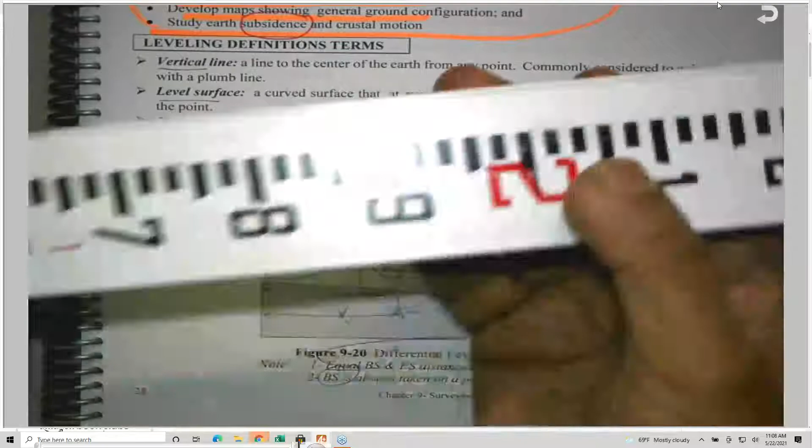The rod is basically a scale, and they have two different types of scales. We are going to see it, and this is an example of a surveying rod. This is a Philadelphia rod, Philly rod. It's basically a vertical scale. We hold it, and we should be able to read it, and I'll show you how. It could be metric, by the way. This is, for example, a metric rod, and I will show you how to read it.

And basically, if you add the rod reading on the backsight to the elevation that's given, it will give you the HI. If you take the HI and subtract the foresight, it will give you the elevation of point B. And here are the two equations I need you to be aware of: equation 9.22 and equation 9.23. These equations, to the best of my knowledge, are not given in the NCEES handbook. They assume that you know it.

And we should be able to remember these basic equations because they are expecting that you are familiar with the process of elevation determination and leveling. So I need you to remember that the HI, the height of the instrument, is equal to the elevation of the benchmark plus the backsight, and the elevation of any point is equal to HI minus the foresight. The foresight, by the way, we call it the minus sight.

Except there are a few situations that I don't know if I mention here or not. The foresight sometimes, such as the bridge, I believe... let me go to the backsight first. The backsight, they call it a plus sight. So here it is, the backsight. They call it the plus sight because it is added to the benchmark elevation. This one here, the foresight, sometimes we call it minus.

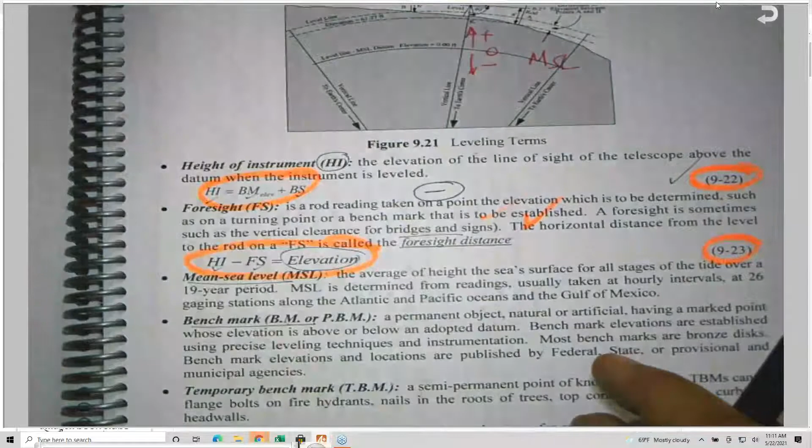Benchmarks are basically a brass disc. Normally it's a brass disc. It has information, the elevations and the benchmark number and so on. And these are public record, by the way. They are available to you. You can ask your local agency, state or county or federal: give me the list of the benchmarks nearby.

We have something called TP, turning point. A turning point could be just a piece of metal you drive into the ground, or it could be a plate, or just a piece of wood like this. We drive it into the ground and put the rod on top of it. A turning point is a temporary point used to transfer an elevation, intervening between two benchmarks. I need you to know that TP, turning point.

Leveling. There are three different types of leveling. One is called direct leveling, or differential leveling, or sometimes spirit leveling. Another one is called trig leveling. Trig is indirect because we are using a trigonometric relationship to calculate the elevation of a point. But differential leveling is direct leveling because we get the elevation directly. So there is direct and indirect. Under indirect, there are two: trigonometric leveling and barometric leveling.

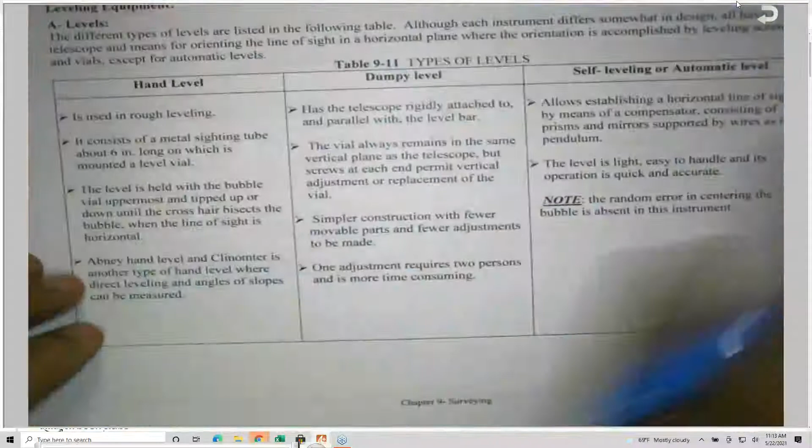So I need you to be aware that differential leveling, or direct leveling, is a very important one. Levels are instruments like this one here. Let me see, I have one here. This is a level. Some of you, if you took a surveying class in undergraduate, remember this. So basically, in leveling we are using a level like this. It has an eyepiece here and a telescope on the other end. This is just to read the rod.

There are different types. It could be a hand level, which is a very simple one, and we don't use this. This is for rough leveling. But the dumpy and the self-leveling or automatic, those are the most commonly used. So basically an instrument to read the rod. There are different types of rods. One is called self-reading rod, like the Philadelphia rod, the Philly rod. There is a rod they came up with called self-reducing rod, the Lenker rod, or direct reading rod.

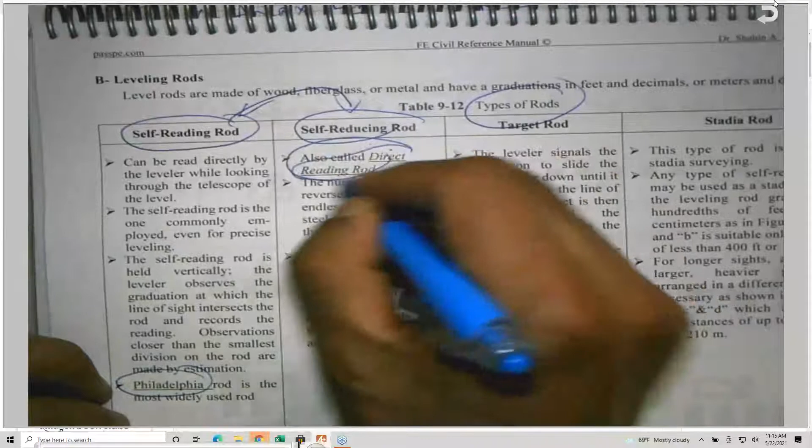Here are some examples of rods. And we're going to see a picture, I believe, of how to read it. Did I include this or not? No, I said it's not important for you guys.

I doubt that he will ask you, but basically this is 5, 6, and so on. Between 5 and 6 there are tick marks, and we take the top and the bottom of each of these tick marks. So this is a Philadelphia rod, the Philly rod. B, this is a metric rod. This also is a metric rod, but we use it for something called stadia, like the one I showed you. Stadia is a technique that we use to get the horizontal distance. Oh, I have it here. Sorry, yes.

Okay, how to read the rod. There is a technique that we use in leveling called waving the rod. The leveling rod must be held vertically, 90 degrees to the supporting ground, in order to ensure the correct reading. Most rods now have a vial where you can adjust it to make it exactly perfect. But if the rod is not equipped with this, we use the technique called waving or swinging the rod.

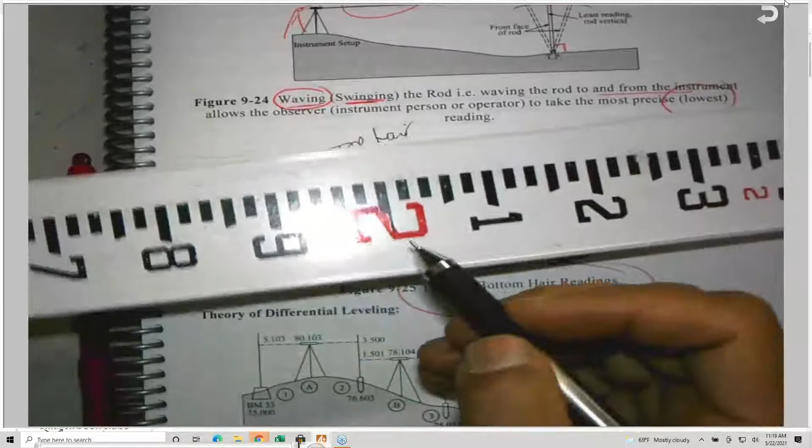Here it is. So this is the 2. This is 2 feet. Normally they make it red to differentiate, because there is another 2 here. This is 2.2. So they make the full mark of a foot red in order to ensure that we are not mixing the numbers. So this is 2.1, this 2.2. This one here is 2.1.

This is 2.11, 2.12, 2.13, 2.14, 2.15 here, 2.16, 2.17, 2.18, 2.19, and 2.2. Here it is. This is the way we read the rod. And I'm expecting that all of you took a surveying class, and if not, this is the way we read the rod, including the top and the bottom hairs.

As I told you, this is called the top hair and the bottom hair. We're going to see it in something called three-wire leveling. Instead of relying only on the reading at the cross, which is called the cross hair, they came up with this technique where we read the top and the bottom also, and we take the average of the three readings, as we're going to see later on.

This is what is known as the differential leveling operation. You start at a benchmark, here benchmark 33, whatever the number or the name of the benchmark. This is the elevation. And you set up the instrument at different setups, setup A, setup B, C, and so on, because we cannot cover the entire distance in one setup. So this is the elevation, 75.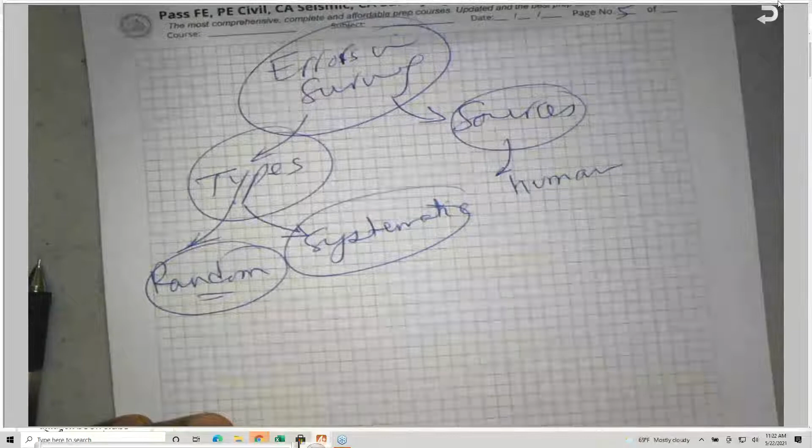Human error, because we are human, we make mistakes and we cannot read everything perfectly. Sometimes we call it personal, human or personal. Instrumental error, because our equipment is not perfect. And environmental errors, because of the wind, temperature, magnetism and so on. So there are sources of errors and types of errors. Any surveying measurement we take is not perfect. It has some kind of error.

But these errors in surveying must be within the standards. We have standards. It must be within them, and they provide us standards, and you will see I believe I'm providing one example of a standard table for the traverse. So leveling is one thing that you might see a problem on in the exam.

Here, something is called curvature and refraction. The earth is not perfectly flat. It does have some curvature.

Okay, and also the refraction, the atmospheric refraction, which affects the line of sight. When I look in the instrument, my line of sight is not exactly horizontal. It will be deflecting down. So these are the equations. Don't worry about it, but I need you to be aware of something called the curvature and refraction.

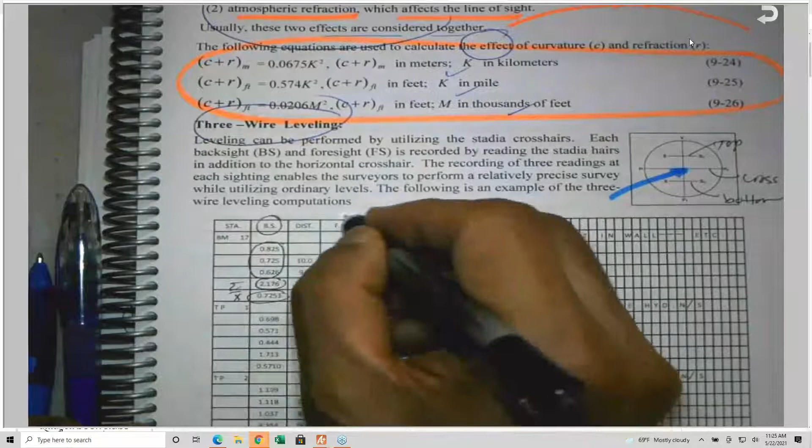So they said, why don't we get the benefit of these hairs? If you look at this, you will find there are three readings here. So 0.825, and this is the sum, and this is the average, X bar. This is for the backsight. For each backsight and foresight, they take three readings, add them, and after that we take the average. And we do the same process as we did before.

I need you to be aware that three-wire leveling is still differential leveling. Instead of taking only one reading at the crosshair, which is the intersection of the horizontal and vertical hairs, they try to get the benefit of the stadia hairs, which are the top and bottom hair, but the process is still the same.

Okay. There is another leveling method we also use that I need you to be aware of. It's called reciprocal leveling. I need you to know that reciprocal leveling is a differential leveling. And we use reciprocal leveling in the following situation. As you recall, we said that when you put your instrument between the two points, this is point A, assuming this point is of known elevation, 168 or 169.4.

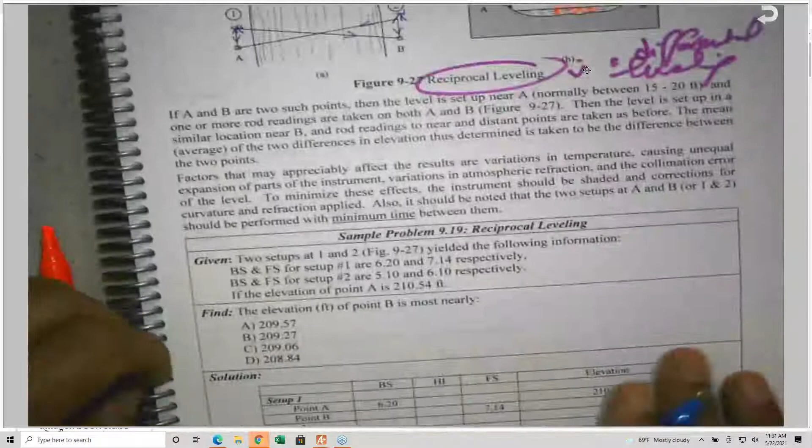So this is point A and this is point B. This is setup number 1, and I will take 2 readings. And I will take the same instrument and put it here at setup number 2, and take 2 readings. And I will average the backsights and the foresights, and I do the process as usual.

Okay? Very important to do this in a very short time, by the way. It should be minimum time, because the environmental conditions might affect the readings. So I will do the reading at setup number 1, and take the instrument and do it. Don't do this in the morning and come in the afternoon to do this. No, it is minimum, okay? It should be noted that the setups should be minimum time.

Okay? I do have a problem here. This is reciprocal leveling where I have 2 readings. At setup number 1, I have readings. Setup number 2, I have 2 readings. This is a benchmark elevation, by the way, which is given. So I will add these 2. This is the sum, and this is the average. If you add these 2, you will get this number, and take the average.

And after that, I know the elevation here. So the elevation plus the average of the backsight minus this will give you the elevation of point B. This is called reciprocal leveling. Okay? Another problem here, problem 9.20.

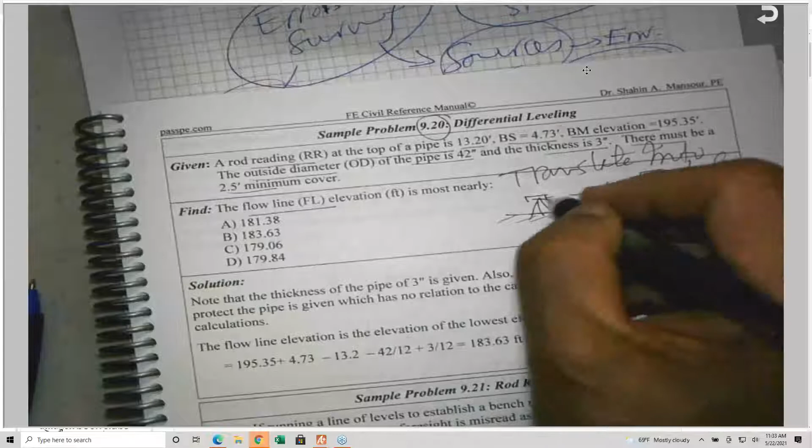So here I have the following scenario. I have a benchmark, and the benchmark has an elevation of 195.35. And I have an instrument, which is a level, and I put the rod on top of the benchmark and took a backsight. The backsight reading is 4.73. Okay? We are going to put a pipe here, water line or sewer line.

So they put the rod on top of this pipe, and they took the reading, and the reading is 13.2 feet. Okay? This pipe has an outside diameter, be careful, of 42 inches. And the thickness of the wall, T, is 3 inches. Are you following me?

If you are thinking about lunch now, do you remember the joke I told you? Lunch is going to be a circular burger or a square burger. Which one is better, by the way, a square burger or a circular burger? As you know, Wendy's, I believe, is the only one to provide a square burger. Most of the burgers are circular. Why? Because of uniform heat distribution.

If you go to Wendy's and get this one, I'm not supporting any, by the way. This is not a commercial or advertisement for any business. The corners may be burned because of the heat distribution. And most of the buns are circular, and when you slice a tomato, it comes almost semicircular, and our mouth is almost semicircular. So this is why most burgers, if not all, except a few, are circular.

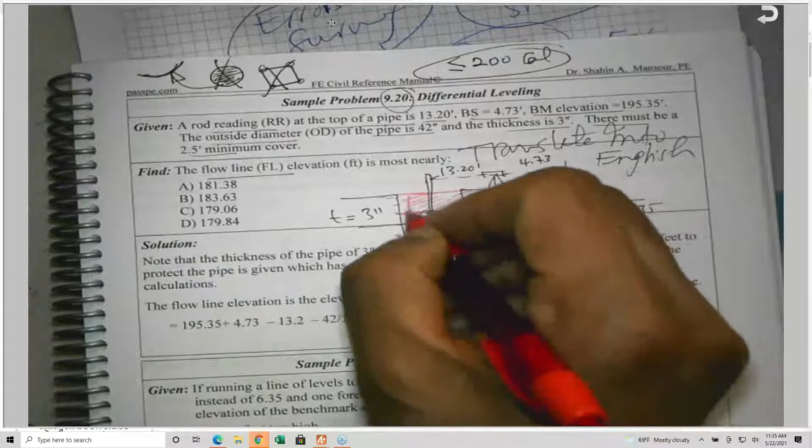This we call cover, to protect this pipe from the traffic on the road. So this is called cover, and I'm sure you get involved in that, either gas line or water line. Each agency has a minimum cover. Some ask for 5 feet - I was working on a project with DWR, Department of Water Resources here in California, and they asked for 5 feet. We even put encasement around the pipe to protect it. So the cover protects the utility pipe from any failure because of the load.

So he's asking, what is the flow line? If you design any water system, sewer system, or drainage system, any pipe you're using, either concrete or corrugated steel metal (CSM) - assuming this is a pipe, this here they call the flow line, or we call it invert.

Pay attention to the word invert or flow line. This is where you design the pipe, because the pipe runs at a certain slope, and you should know the flow, the Q, which depends on the slope. Q equals V times A, and one equation is called Manning's formula: 1.486 divided by N, times RH to the 2/3 (hydraulic radius), times square root of S, multiplied by the area. S is the slope of the pipe.

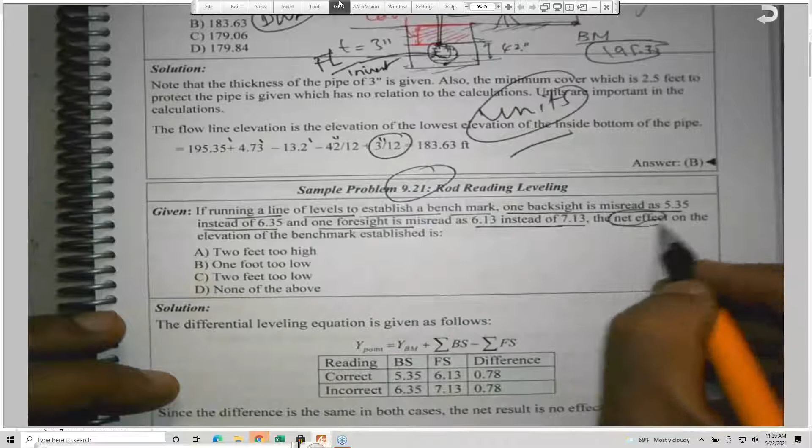This is a keyword. Any question has a keyword or keywords, and always pay attention to the keywords in the problem, because this leads to the answer - it's asking what is the net effect on the elevation of the benchmark established. We know the elevation of any point equals the elevation of the benchmark plus the backsight, which is a plus sight, minus the foresight. This is the equation, if you remember equations 1 and 2.

So if you take the reading that was misread, and what the correct readings are - since I'm adding and subtracting, the difference between them, if the difference is constant, obviously there is no effect at all. He told you the effect will be 2 feet too high, or 1 foot too low, or 2 feet too low, or none of the above, or no effect at all. Here it is, no effect at all - this is obviously no effect. The net result is no effect, because I'm dealing with adding and subtracting.

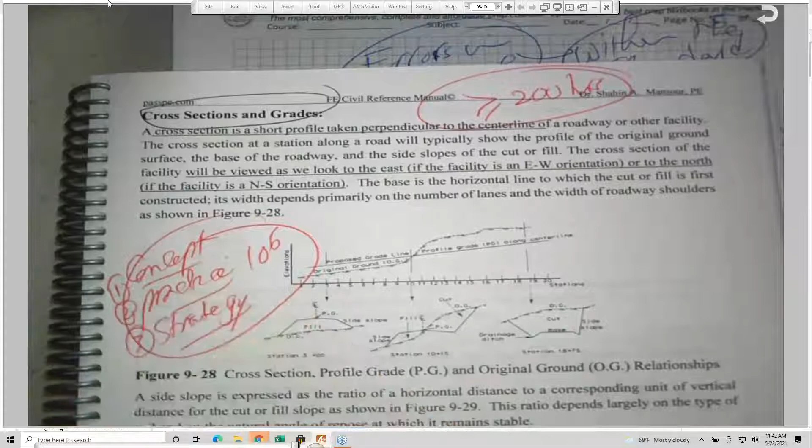But if you are taking the exam before that, I'm sure you will search and get whatever book or books are available in the market, and try your best. You need to sit and study and solve problems—solve and solve and solve. As I mentioned before, you need to understand the concept, you need to practice, and I practice a million times. Then go to the exam with a strategy, where you pick the easy questions first. Those are the three things, from my point of view, but obviously you are the one who decides. So understand the concept very well and practice a million times. Any kind of problems available, get hold of them, try to solve them, understand them.

After that, when you go to the exam, you have to go with a strategy. My suggested strategy is pick the easy ones first, and leave the long and lengthy one, or the most difficult one, for the end if I have time. If I don't have time, I will pick one answer, but don't leave anything blank—pick one answer and pray to God, that may God accept your prayer.

But prayer alone is not sufficient, by the way. Don't say that for every problem you are going to pray to God. I have an engineer friend who told me, 'Dr. Mansour, shall I go and pray for every problem?' And I told him no—you need to study and study and study and practice and make mistakes. Yes, there are some problems on the exam you may be surprised you never heard about, or you did not get a chance to understand the subject. In that case, for 1 or 2 problems you can pray to God, yes, but study and pray to God.

So, cross sections and grades. For any road, I show an illustration here of a profile grade, the PG, and the OG, the original ground—normally we use these abbreviations. So if I have a profile and an original ground, I might have some fill, some transition, and some cut. So we have cut and fill. I need to know the side slopes, vertical and horizontal, and normally for English units we use 2-to-1; for metric they reverse it.

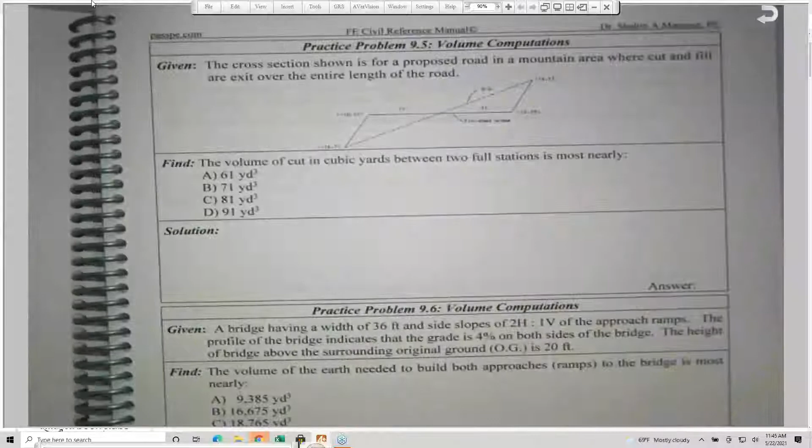Problem 9.7: here he gave you the moisture content, he gave you the shrinkage. We need to understand this, and I provide the solutions here. I repeated this diagram again for the last practice problem, 9.7. So the bank cubic yard, loose cubic yard, compacted cubic yard—they assume you understand all these things, because there is nothing in the NCEES equations or in this diagram, the one I'm suggesting.

If you look at problem 9.22, you are given a profile sheet that begins at station 1 plus 45 with a given elevation. So I have here station 1 plus 45 and the elevation 350.

They said this is the starting point. I have a grade of negative, so I went down negative 0.3% to station 4 plus 50. And a grade of plus 1.35%, so the grade plus, this is positive grade G, as we're going to see this afternoon in the stopping sight distance. Like the stock market, anything that goes up is positive, anything that goes down is negative, as all of us know. So plus 1.35 until station 10 plus 45. And finally negative, a very steep grade, negative 10.8% until you hit station 12 plus 50.

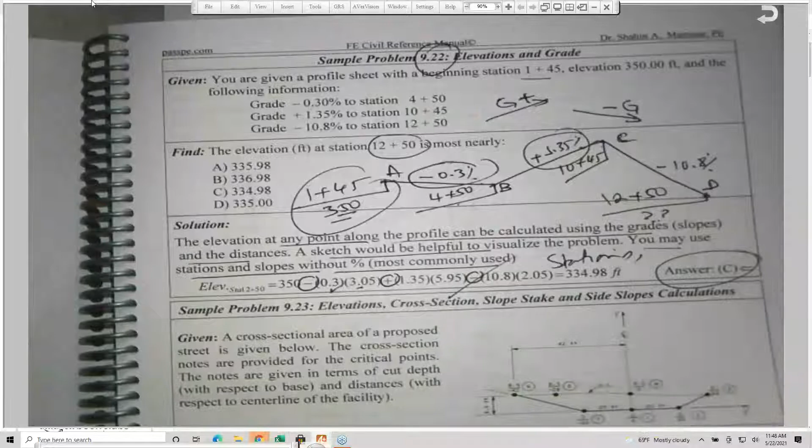Sometimes they give you a cross section like this and some reading, and he's asking what is the side slope. This is called side slope. We know the slope is, we have horizontal distance and vertical distance. So please look at that. Plotting your cross sections, we need to know the cross section, positive, negative, and so on.

By the way, I kept here, this is one of the references that we use. It's called the AASHTO Green Book. You are going to see it this afternoon, but they are using the old one, the old green book. I will show you both.

So when you look to the topography, the type of terrain is called the type of terrain, TERRAIN. We have level terrain and rolling terrain, and the third one is mountain or mountains. Level is almost like this, okay, there is up and down but not too much. Rolling terrain is like the county road, like this, you go up and down, this county road you'll find. Mountain, obviously, you have a mountain, very obvious.

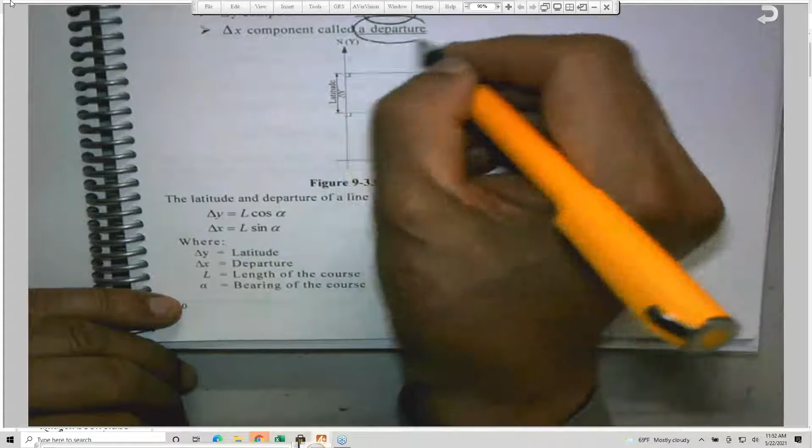Closure: in the last few minutes, I will talk about the closure. Any traverse, a traverse is a continuous series of lines, they call them courses, and traverses could be either open or closed. What I need you to know, very important, two equations, okay? One equation will give us the latitude, and one gives us the departure. Latitude and departure. What does it mean, latitudes and departures? Any line has two components, one in the X and one in the Y.

Okay? So this line AB has a component along this direction, the X direction, or the eastern direction; we call it departure. And this one is called latitude. If I know the slope of this line, or if I know the angle, which could be a bearing or azimuth, then we are talking about sine and cosine. So here are the two equations to determine what is known as the latitude and the departure.

Exactly like we did for statics. Do you remember statics? We said that this is the F, and if the angle is given with the X axis, for example, Fx is equal to F cosine theta, and this is F sine theta. Or if the angle is given with respect to Y, this is F cosine theta, and this is F sine theta. So basically resolving the force into components. Here we are resolving this length AB into the two components. One is called departure and one is called latitude.

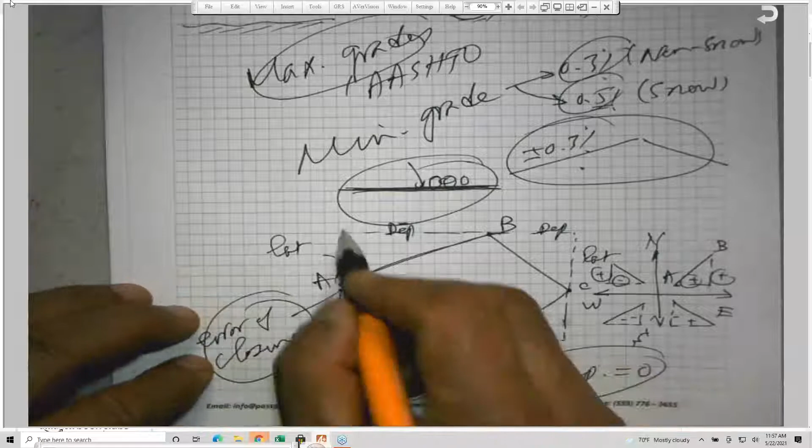So I need to be aware of this sign convention because the sum of the latitudes and the sum of the departures must add up to 0. Because here I go up, here I go down, go down and go up. So this is positive, this is negative, this is negative, and this is positive for the latitude. For the departure, this is positive and this is positive, this is negative and this is negative. So the positive and negative should cancel out if the traverse is balanced. If it's not balanced, we do have a process to balance a traverse. So I need you to know what is known as the error of closure. There is one equation here.

I have some problems here about distances and coordinates and the bearings, latitudes and departures for lines, sine and cosine. I needed to be aware of that. There is another problem, 9.26. What is the bearing of the last course? A very good problem. And after that, I added the practice problems at the end. Please go over them, and I will be glad to help you if you have any question related to

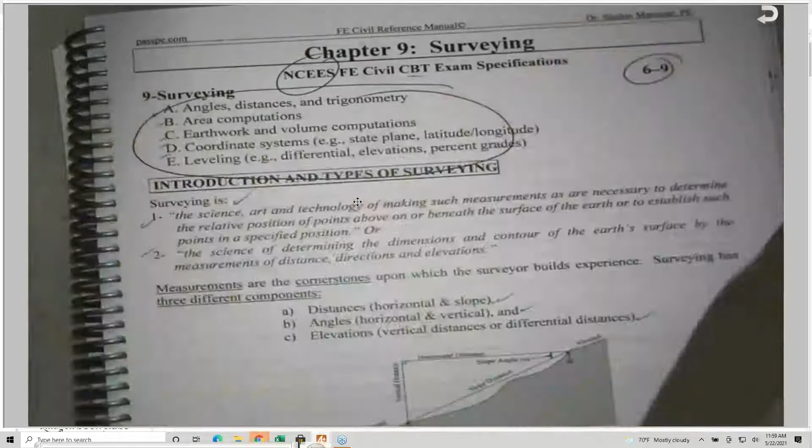This afternoon, we're going to have 1 hour lunch. Unfortunately, I'm going to use almost half of my lunch to come up with 2 problems. If I'm not able, I will send them to you later on. But the package for transportation this afternoon is a very healthy package. I have 3 transportation books, and believe me, I extracted what I can get from these books. But obviously, I'm providing you all the equations.

Transportation, 9 to 14 problems. So also a large number of problems in the transportation section. These are the equations that are provided by the NCEES. And in the future, probably I will add page numbers here, but I will give you the page number and we'll go over these equations. A lot of material. And I provide you with a lot of illustrations in order for you to understand the subject, and it will be fun this afternoon.

And this is why I appeal to you not to go to the square burger or the circular burger, as we said. So try to get something very light, like salad, 200 calories. Normally, I look for your eyes to be at least 45 degrees, greater than or equal to 45 degrees. I don't like your eyes to be less than that. So enjoy your lunch, and please stay away from the circular burger or the square burger, as I was joking with you guys.